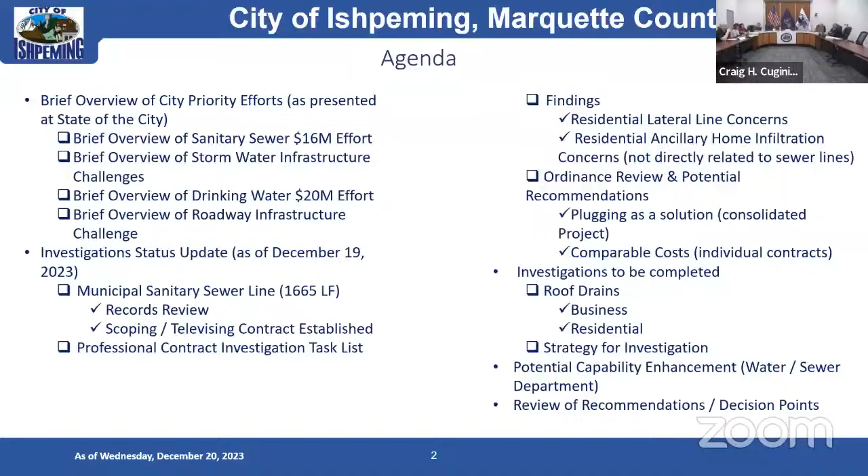As we go through, there are header slides for when we change sections. I'll call those out, and the slide will flash to the next slide so we don't spend time on header slides. I've given you a moment to look at the agenda, but we will go through this. A lot of it to start is background related to what we know about sewer infrastructure and where we're headed with some of our projects. With that said, we'll begin.

The sewer project is funded, and even as of today, our engineers with UPEA and the contractor are working out some additions and subtractions. As you're aware, we scoped everything on this map in our original request, based on real data of real cost at the time we submitted. By the time we got through the process and funded, we were about 50% of actual costs due to economy shifts. So we are rescoping to identify what will and will not be done.

Since then, we've also received notice that we are in the intended use funding for drinking water, $20 million of water. So we're looking to see whether or not we can align sewer and water together along those lines and get that into the scoping as well. None of the areas will change other than it'll be in or out.

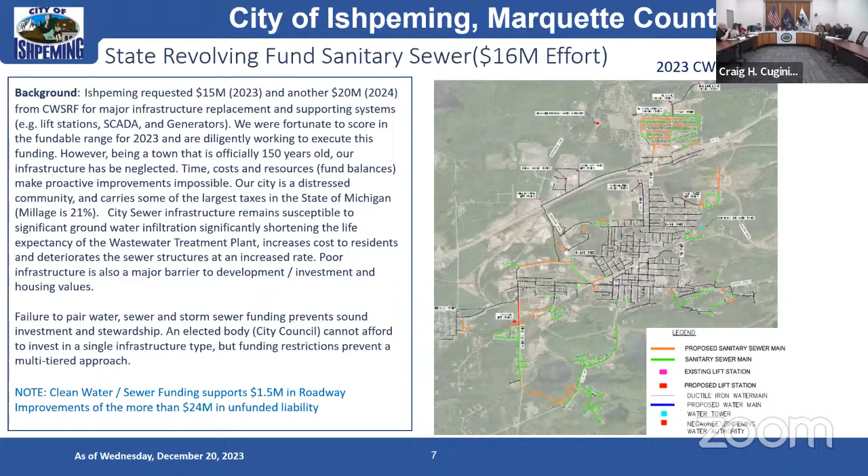Next slide please. Looking at the question asked by the council — was any of this downtown area included in the sewer project? The answer is no, none of the downtown investigated area is in the sewer project. Within the investigation, the results indicate that the lines there are newer, PVC, and in good condition. We'll have that for you in a little while, but that answers one of the major questions that was asked a couple times.

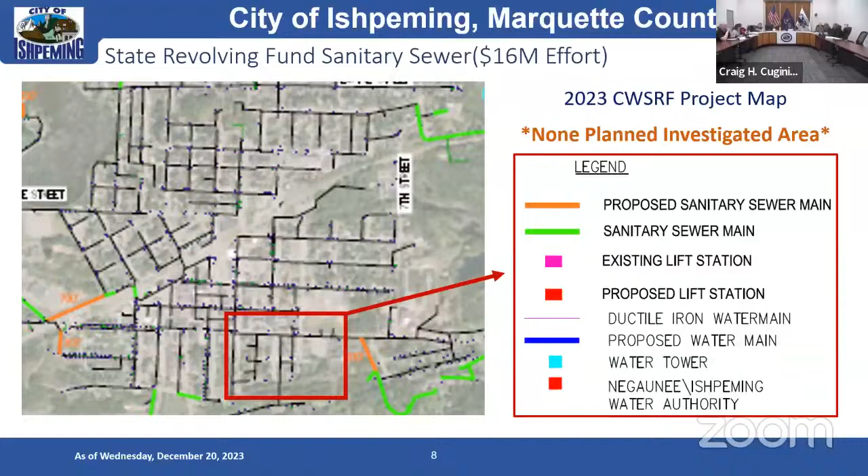Moving on to the next section, we'll do a little bit on stormwater. Stormwater is different from sewer and water in that it's harder to fund — to get a loan you need a revenue-generating tax base, and we do not have tax revenue generation for stormwater issues. So we must seek grant opportunities, which are very hard, and 100% grant opportunities are even harder. We'll have to figure out how that looks for the future, but we know we probably have at least $11 million worth of storm areas, and there are areas that were never even included in any stormwater project.

Way back in the past, when developments were made, they thought the soil conditions didn't warrant storm sewer, and now we find that there are areas where people's yards are flooded and other areas where storm sewer should be. So that's part of that $11 million.

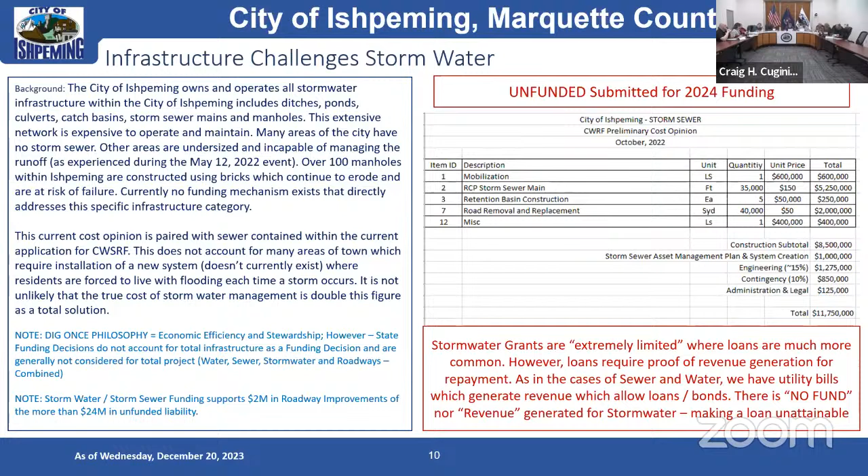Switching over to the drinking water, this is the new $20 million funding we're working on this year to be executed in '24. Again, this is scoped as our projected total scope, and where the final bids come in and the costs, we hope we can do better than the 50% scope we ended up with under the sewer.

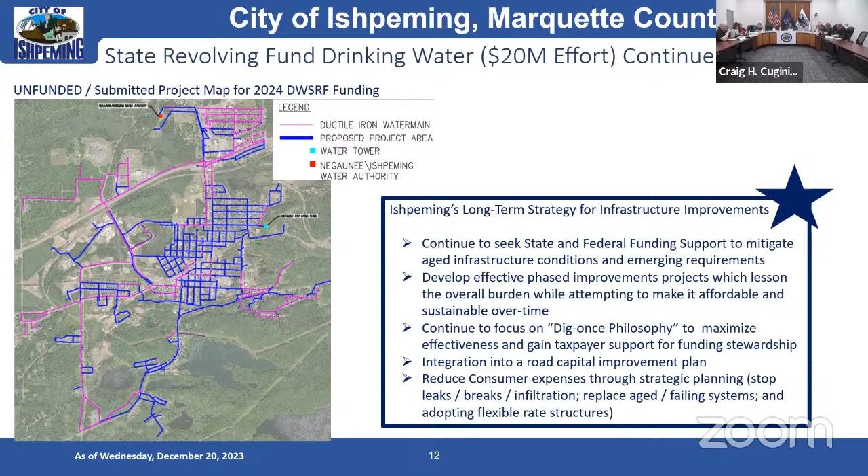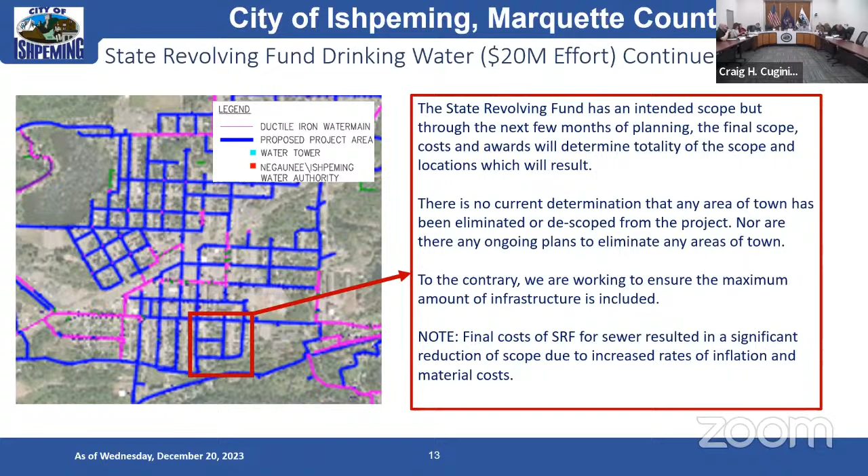Looking to the next slide, this is where you've asked us to look in that downtown area, and there is some potential project area for water in this location, which would ultimately likely result in some pavement work, part of the next discussion on roads.

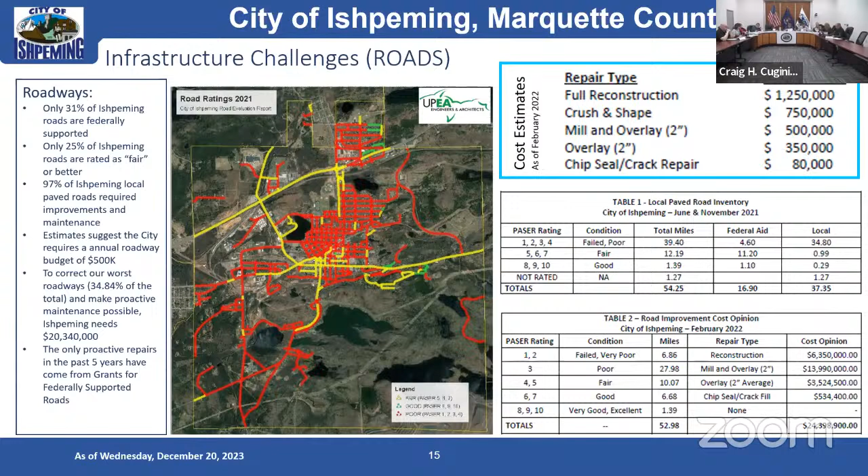So when we look at roads, this is the road map we've had. I'll call out that downtown area in the next slide. In that downtown area, it is rated as poor or failed, which is about 39 miles of our 54 miles. That poor rating results in a projected cost of mill and overlay at about $500,000 a mile.

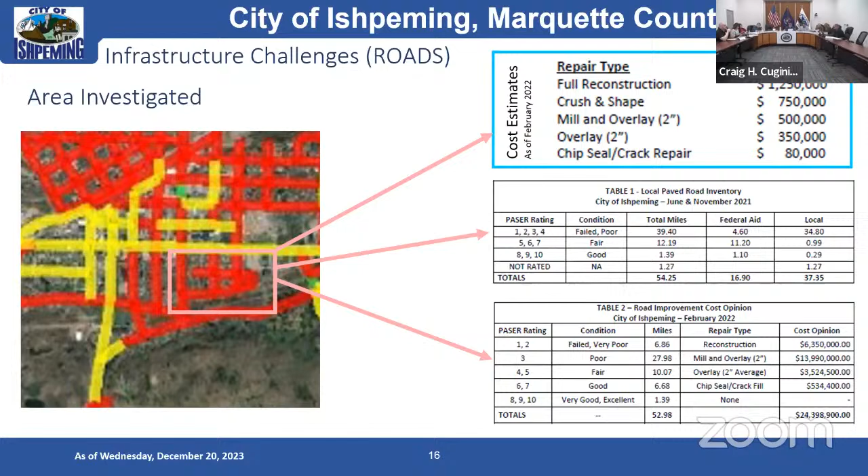So we have to do some calculations on the total effort that could be included based on what is included in the final water project, to tell you how much will be done, but we won't have that for at least 5 months.

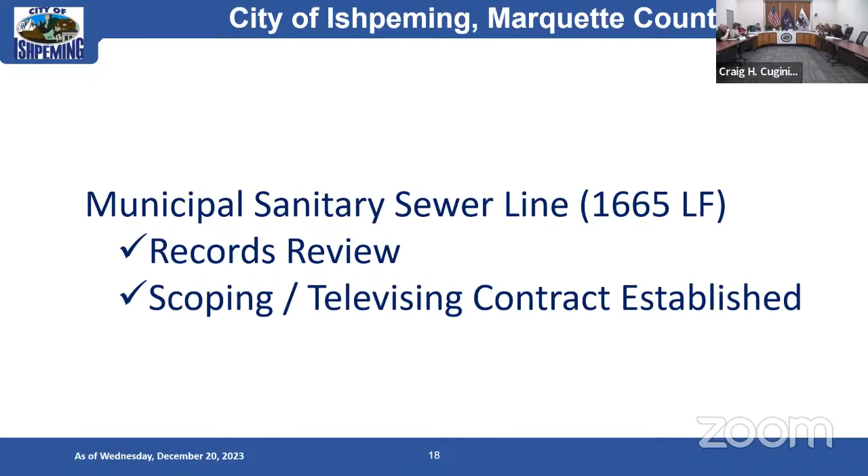We first wanted to make sure we located and understood where our sanitary sewer is. We wanted to look at our records and get in and do some televising. When we say televising or scoping, they're synonymous for us - it's a camera going through the system, taking photos and tracking with GPS where they're at in the line, so you can actually see where it's located. The green lines on this picture are the actual locations of the city sanitary sewer.

That sanitary sewer was a combined sewer, which was separated in 1982. So it used to be storm and sewer combined; now it's sewer separate from storm. When that happened, the old clay tile sewer system was replaced by PVC, and the storm sewer was replaced by concrete pipe, which is today's standard and is in good shape.

So then we also looked at lateral connections. When we talk about lateral connections, we mean anything coming off perpendicular to the city's main line, and generally laterals are connected to a home. So when we say lateral lines, we are generally talking about lines connected to a residential home, could be a business in a business district or other types of structures, but generally laterals mean connections from the home to the main line.

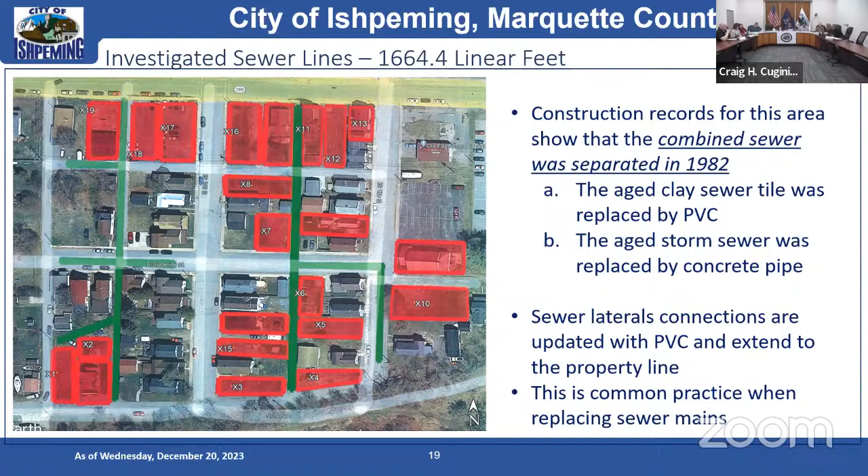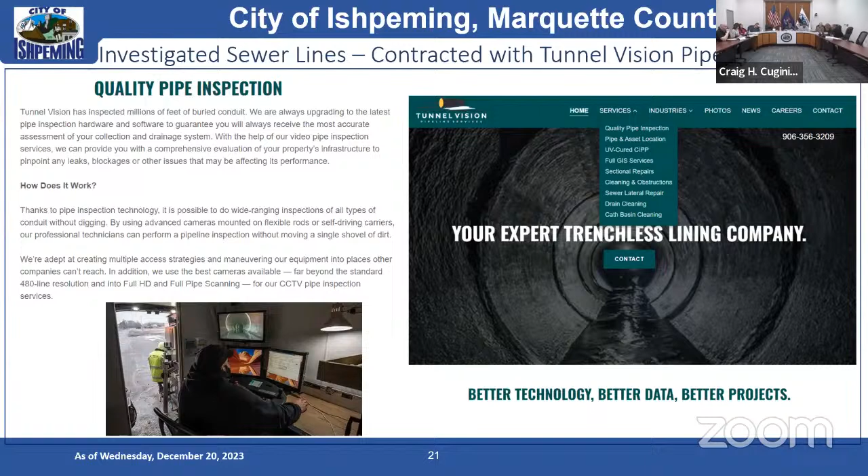So we have to contract with someone to do this, and a recognized leader in this service based out of Escanaba is Tunnel Vision Pipeline Services. They've been working with us for years, all across the UP and Marquette County. This slide just gives you a general idea of what they do and how they do it.

The next slide highlights a few spots. Basically, they're doing a pipe-specific evaluation that results in mapped assessments of the conditions of buried infrastructure, so you don't have to dig anything up to look. You can do it while it's still in the ground without causing extra disruption. They're intended to identify issues, what might be contributing to problems, and help us decide what the project would need if something was wrong.

That could be lines sagging, bulging, separating, cracked, or broken—any of those kinds of things are generally what we're looking for. We can also see tree roots growing through lines and other issues. Sometimes lines are blocked. Whatever the condition may be, this is how we can find it without digging up anything.

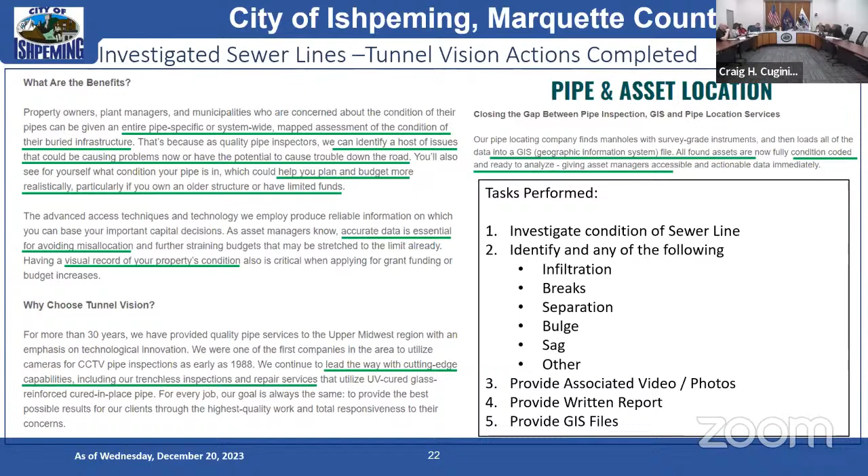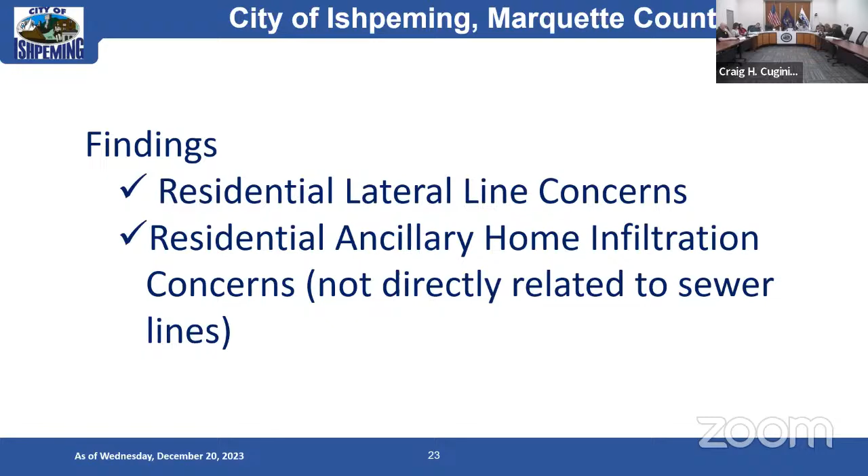We're going to start looking at what we've found along the residential area lateral lines. I used the word 'generally' earlier—the findings will indicate that not all of them are connected to residential homes, but are on residential lots. So there'll be some that are connected and some that are not. When we find they're not connected, we use the terms orphaned or abandoned, meaning they're laying in the ground, not connected to a home—therefore orphaned from a home. These are just terms we use, not meant to confuse anybody, but I want to make sure everyone understands what we're talking about.

We looked at these homes in particular as some highlights. We looked at the entire neighborhood—we're still looking at the entire neighborhood. We're not separating ourselves from it, but we wanted to bring out some highlights. Some of these homes were specifically addressed by residents in public comment at council meetings, so we wanted to make sure that when they're here, as they are tonight, they can see some of the conditions we found. This shows that we've investigated all of those, and these are some conditions we can call out to help you understand what we found.

When I say residential lateral lines, I'm talking about those connected to a home, but they might be identified as residential because we think they are, and then we might still discover they've been abandoned, orphaned, or cut off in some way.

That's part of the ongoing investigation, but I'm going to start turning this slide presentation over to Bill, because he's going to discuss and describe areas of the map, pictures on the map, and also contribute some video by sharing his screen on the projection for everyone to understand. So, Bill.

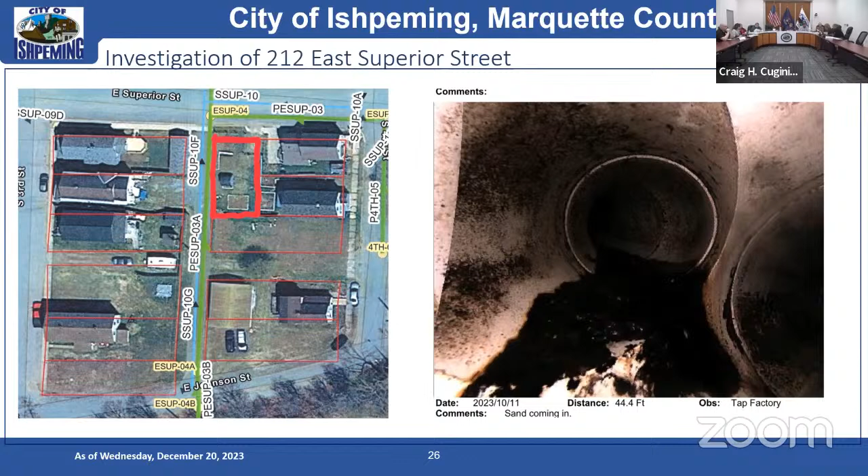I'll show a couple examples before I show the video. The first one you're looking at is on the corner of East Superior and the alley. There must have been a house there at one time. If you look at the picture on the right, that's the actual sewer lateral going into that lot—it's not hooked up to any building. Whether the building got torn down and wasn't capped properly, or the pipe broke in the yard, you can see all the dirt coming into that pipe.

So just to add some clarity and make sure everybody understands: when we have these pipes that are not connected, they're still underground, laid where they originally were. No one's dug them up or turned them—they're not tilted in any way unless Earth did it over time. But they're laying there with an opening, collecting water, and pushing water, dirt, and debris—we haven't identified exactly what it is, but it looks like muddy water. So what you see is those lines we're spotting on an empty, vacant lot.

They are collecting water, they are moving water and earth, and that is carrying into our city mainline sanitary sewer. So when we call out water infiltration, also known as I&I, some other industry terms, that's groundwater moving in, infiltrating the sanitary sewer, and all of that then goes to the treatment plant for treatment.

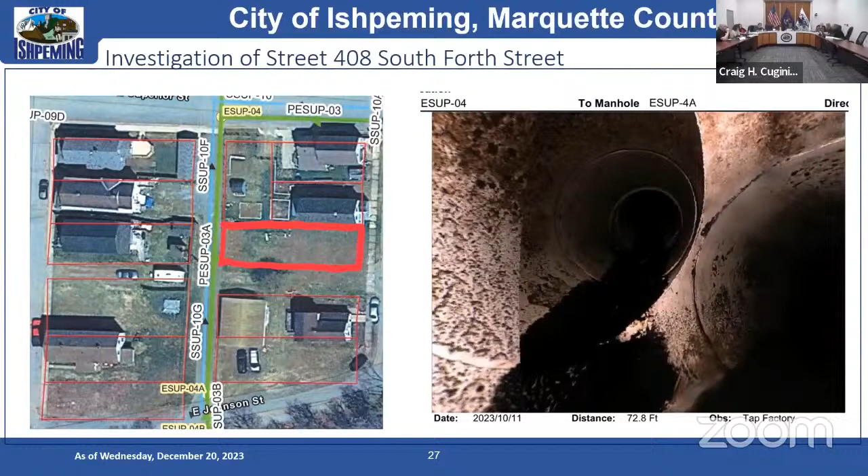Here's another example, same sewer line, main line. This one's on the west side of the line now. Another house was torn down, and you can still see the mud and debris that's coming into that pipe. This is another one that's not capped. Pretty sure it's not capped. I mean, you wouldn't get this type of debris any other way.

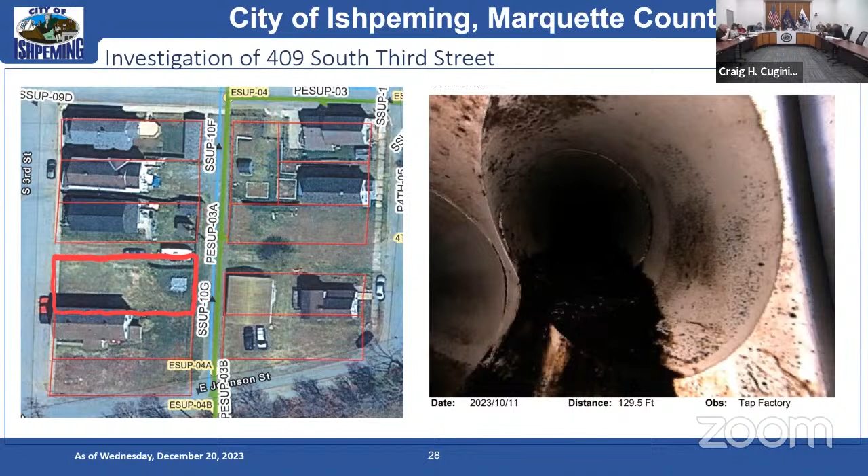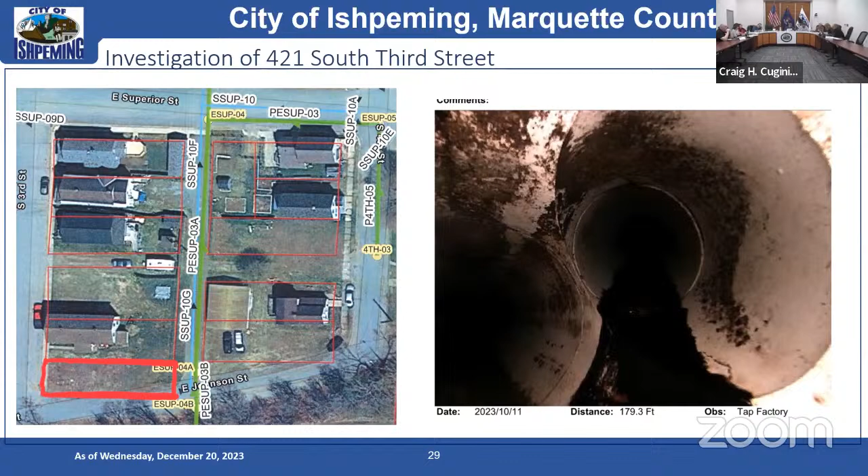This is also one right before the manhole. Another house was torn down, and you can see the debris coming in on this lateral.

Where was this one again? It's on Superior Street, but I don't have a record of this tap existing. So somebody did this, and I don't have a record of it. So we'll probably end up having to dye a bunch of houses in the area, but we can't do it until we have the camera in the pipe. And then when we dye the houses with different colors, whatever color comes in there, that's the house that has this tap, which absolutely needs to be fixed.

So again, just to be clear, what we're saying is that there is a line that was installed somewhere in the vicinity of Superior Street that is carrying likely sewage, but also has been tapped in a random way where you can see bolts coming through. But we don't know who installed it or when. It's not on any property record cards of the city as being an installation. That does not mean that they didn't draw a permit and have permission to do so, but we don't have record of that happening.

But in order to trace this line, we use a dye method, with multiple colors flushed down multiple toilets or somewhere into the sanitary system at a similar time, and watch for the color, and whatever color hits this is connected to this line. So we can't even say this is abandoned or not at this point, but that is a future assessment that has to happen in order to figure out where this line is coming from or going to, other than we know it's hitting the main.

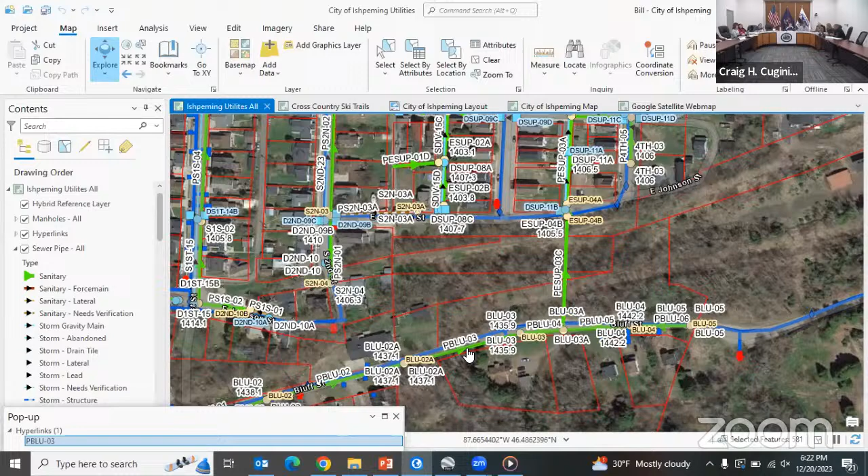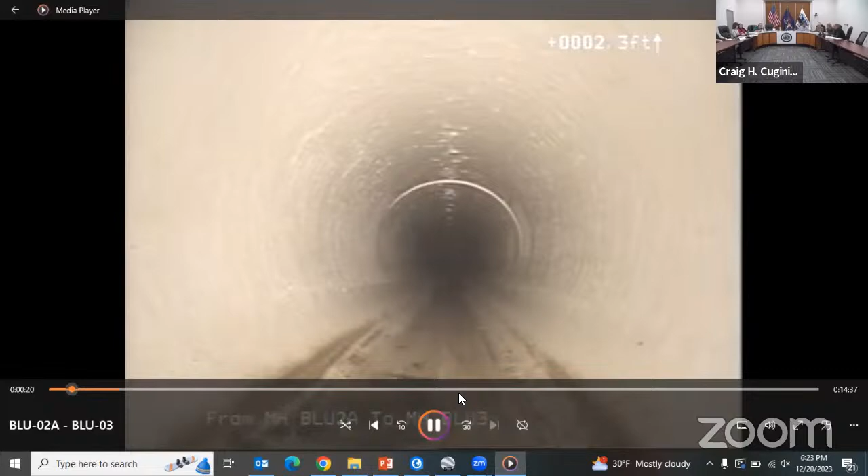So Bill. Okay, so this is our GIS map of the area. I wanted to show you one video first before I get into the other one, but this is the line that is in question, the one that has the most problems. This line up here is a contributory to it. And if you look at this video right here, this is what a sewer pipe is supposed to look like. Nice, clean, and everything.

So this is the line that's in question. And if you notice all the mud and debris on this pipe throughout the whole thing. Keep in mind that this pipe, we had to clean it before we could even videotape it. They tried to use a sewer camera, and the sewer camera wouldn't even go through there. So this has been jetted already.

What's the diameter of that now? 8-inch. And I knew this was gonna happen. Generally our mains are 8-inch, and generally laterals are 4-inch.

It's easier when you're in the office with two big screens. I hear you there.

Totally. So we can actually travel down the pipe. You can see all the joints are good. The pipe is new. There's no separations, no cracks, no roots, no nothing. You could sell this to VR.

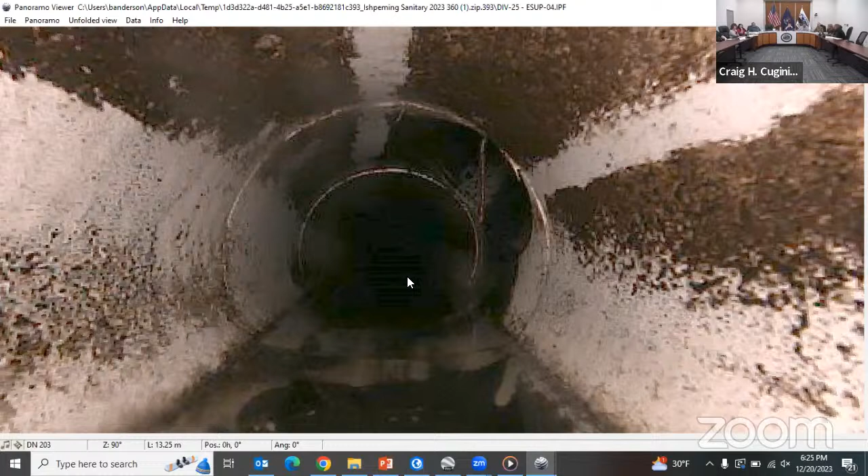And so as you're looking at this, we've evaluated 1,664 linear feet in this neighborhood of pipe doing exactly this. The camera going down through the entire length and looking for any kind of joint issues, separations, roots, other penetrations, things that aren't supposed to happen.

This is kind of where Bill's indicated what a clean, normal sewer pipe looks like, and then what you see here, and having to jet this. When he says the word jet, we run high-pressure water through the system in order to clean it, so to speak. It's like taking a garden hose, sometimes you have a little spray so you don't kill your plants, you spray light water, and then when you want to wash your car, you turn the setting to a harder jet. This is like almost fire hose jet kind of jetting when we go down this and clean it, and you still have all of this dirt and debris mark on the pipe. So just trying to give you some perspective of what Bill is indicating.

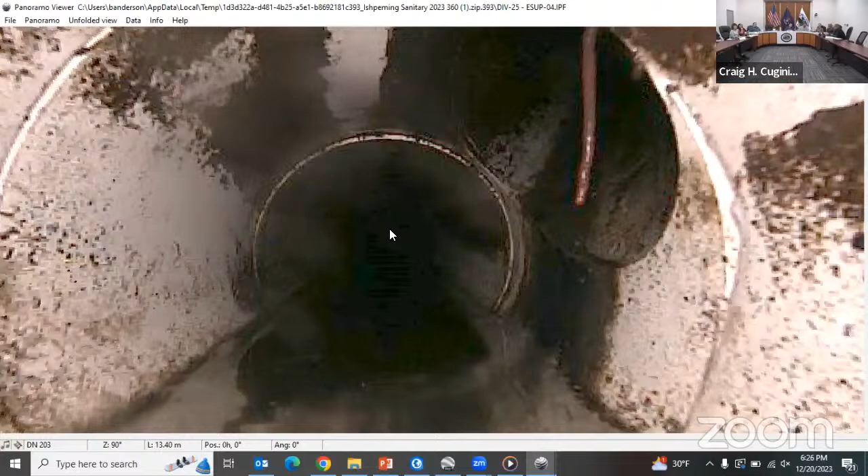You said you guys had to clean this before you could even shoot in there? How do you clean those? With the big Vactor truck. Isn't that the jetting you just described? Yeah, so the Vactor has a jet on it, and they can shoot water into the pipe at one end and have it flushing down as they're going. And they can push that water down at high pressure, and then make sure it's clearing the area we're going to investigate. Just trying to be educated, that's all. Nope, and that's what we want. We want everybody to understand what we're trying to do and how we're trying to do it, not an intrusion.

So this is the first lateral that we come to. This is actually a worm that's coming out of their sewer lateral. So there's obviously debris or something coming in, so their lateral has to be broken in some way, shape, or form. But just so you know, what we do is take the sewer camera, go down it, and you can tell where you are in the pipe by this number right here. And then what we can do... What size pipe is this one, 8-inch too? Yep.

It's not gonna let me do it so easily.

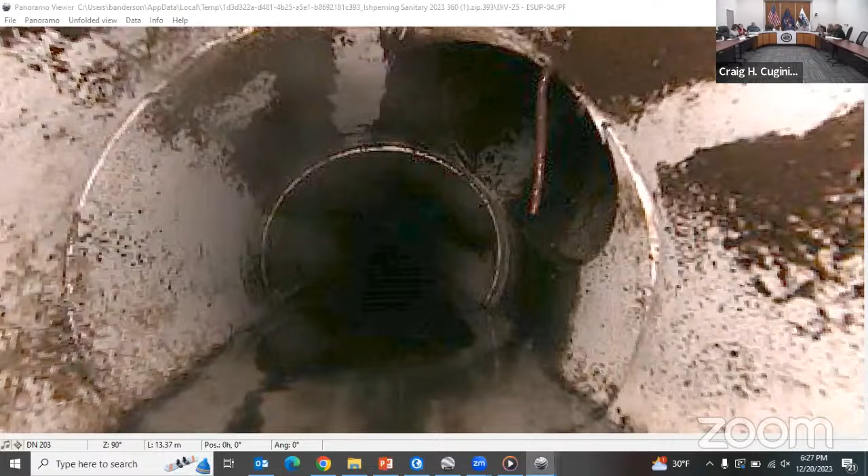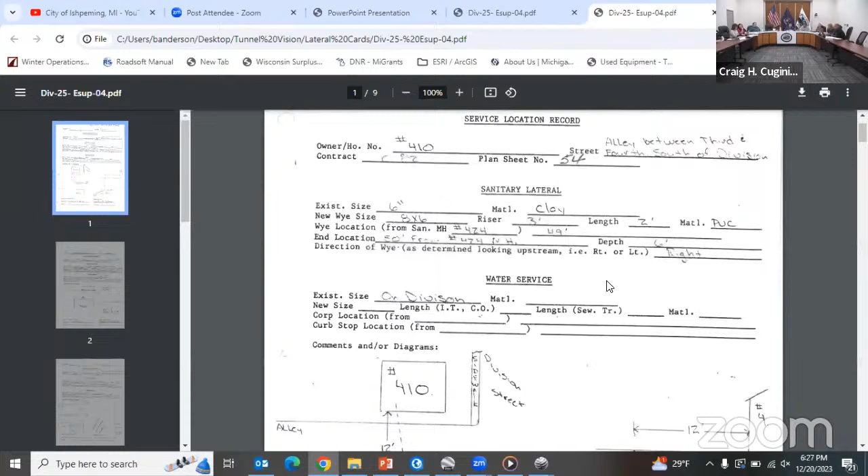This matches a little bit to the pictures shown on the previous slides too, where it looks like two pipes running together. So that's what you're seeing, Mr. Scanlon, when you asked if that's an intrusion. What was hanging down was an earthworm, probably associated with dirt. When dirt's infiltrating the system, that usually means a break, a crack, or some sort of penetration.

Were there any possibilities it was a joint that it may have been coming through? These are pushed together at the PVC joint, pushed together with a rubber gasket. It doesn't leak. For it to, the pipe would have to be sheared, or it wasn't installed properly, but I've watched this video, I've watched all of these videos, and every one of the joints is intact.

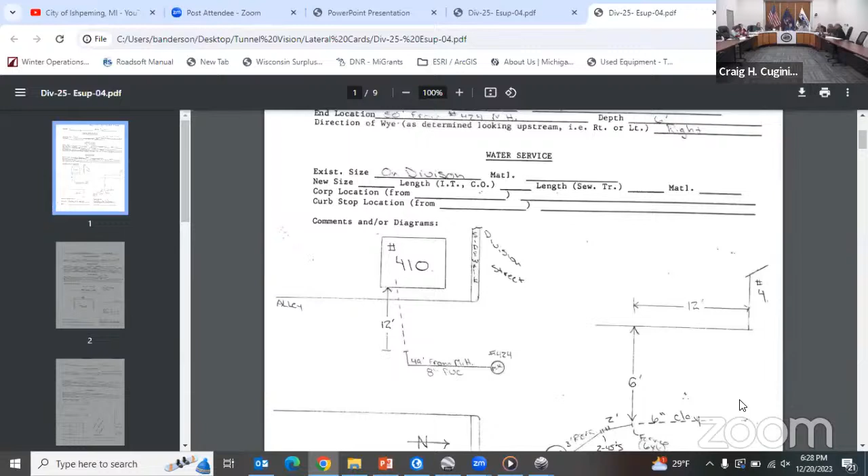If you turn the camera, which I'll do in a minute, you can actually look up and see 2-3 feet of the lateral. But what you can do is take that number I just showed you, and we have lateral cards for each one of the houses. This is gonna be the first house, and it's 49 feet from the manhole. So I can match up every single lateral to the pipe that I just showed you.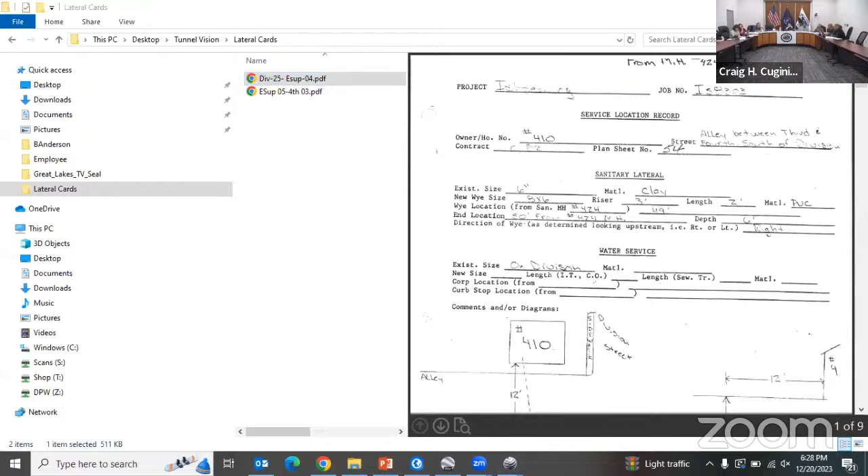On board this camera is technology that is essentially grabbing its place in space and time using global information systems, or GIS, to say you are here. And it's pretty darn accurate. It's the technology we use for surveying, the technology we use for everything. Your phone tracking you, getting you maps down the highway - that's all GIS. And so this is on board the camera.

One thing I would like to, if I may, for Todd and some people in the audience, I'm gonna ask what house that is. That's not to point out anybody's house or to lay blame - this is all completely neutral right now. It's not about blame. Another thing is who owns those vacant lots - that'll be asked, again not to lay blame or cause trouble. We're all working to get these things fixed for you. So don't get upset when I ask whose house it is and they answer, because that's gonna be a big question if I know where our problems are, okay?

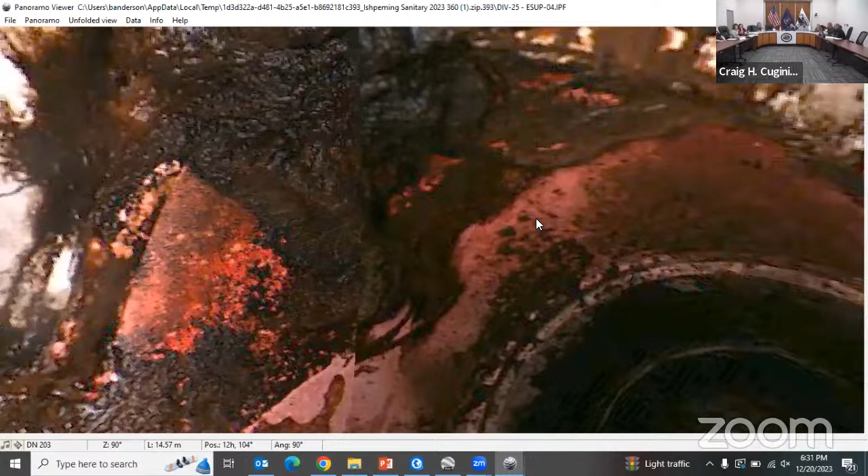So I mean, I can go down there and show you every one of these. Or go back to the lateral for 410, Bill, please. And what was your comment on that one? You can actually see the water - it's been leaking so much that it's actually stained the inside of the pipe. Oh, okay, gotcha. And all of this debris in here, that's mud.

Yeah, that's a lot. When I first started this, I was expecting to see a broken pipe somewhere with the amount of debris and everything. I've literally watched every part of this video, all of this whole area. There isn't a single pipe that is broken on the main line or where the laterals are connected.

A lot of it is the sewer laterals coming out of the houses or into these vacant lots, and we haven't went up the laterals yet. When I normally do one of these things, I expect to find maybe one house, one lot that is contributing. Never in my wildest dreams did I think there was, I think at one time I was counting 19 different lots that have laterals going to them, that I think have laterals that are contributing.

Again, I'm not done doing my investigative work, but this is what you wanted at this meeting. And I can tell you with 75% certainty that all of these are not connected properly. There's more work to be done. Have you guys went through the laterals yet? No, that's the homeowners.

So to that question, the first directive is to determine whether or not the city was contributing to a problem raised by residents. As we investigate and determine that the city line is intact, and as we find these contributing lines, we can then bring back to you a decision for how you want to address this. But again, going back to the initial question of what a lateral line is: a lateral line is generally a line connected from the homeowner to the main, for which ownership is usually the homeowner on a residential lot.

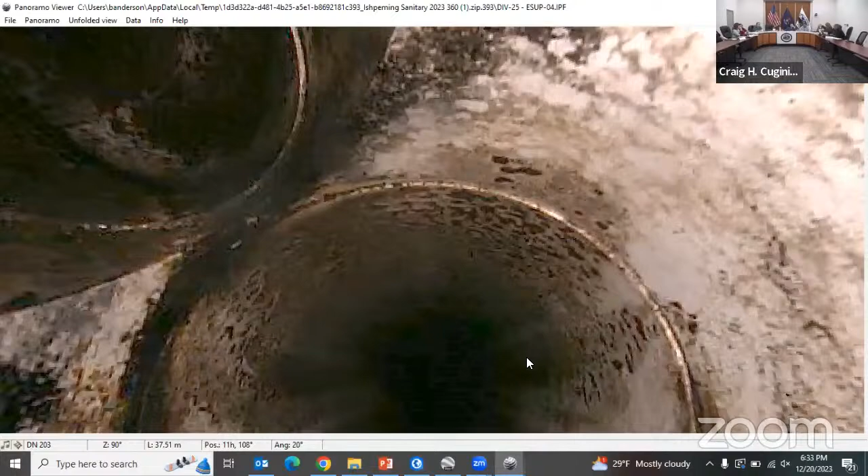And so we can look into the connections, we can look up the connections. We should not be going into the connection without the homeowner's permission or as a participation with them. Because if, say, the camera rolled up there and broke something, did we break it? Was it broken before we got there? Where does that come from? So we do not enter into the private property side of things right now.

But that is something that we can discuss and you can direct as you see fit. But we did not, for the sake of this presentation, have anything that looks up into the private laterals. And again, I want to reiterate, I'll use my friend Mrs. Sylvester. If we go over in her neighborhood and we know her house is a problem, I'm not in a position to say that the Sylvesters now have a problem on their hands and the city walks away by any means.

That's not where, and I think council will agree, what we're doing is we're looking at what's it going to take, in Kathy's case, to correct the problems that we may or may not find. You know, there's a million things that have happened here long before any of us were on council. There's things that have happened in modern times that might not have happened to the best ability of the city. Things like, well, they put new main in and they didn't offer help to the homeowners, we'll check your laterals while we're open.

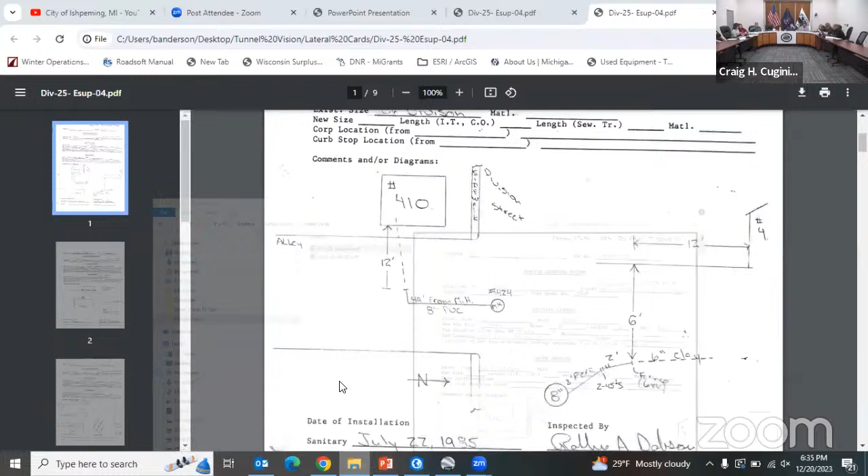No, yeah, and thank you for that clarification, Mr. Cannon. What I want to say is that we're following a systematic approach of first analyzing the city main, because the question was, is the city contributing or causing problems for these residents? And so we do it from what we know is our ownership first, and then we will list our findings and call them contributing. There are opportunities where infiltration is occurring. We don't know to what level or scale either, because we've not investigated that.

But to Mr. Mayor's question, did we go into those laterals? No, not yet. Could we help and work with residents to analyze those conditions and situations? Absolutely. We have some identified potential opportunities, and we can talk about those as we go through this presentation. But yes, this is simply to say what we have and have not done, and that there is a lot to discover, as Bill pointed out. We thought maybe we'd find a handful, and we're into two hands and two feet full, all right?

And so there's a lot going on down there, but so far the camera and video footage has indicated that the main is in good condition with some indications of contributing factors, which is what we have to continue on to from this point. Do we have more lateral video, Bill? Yeah, there's one, I'll give you an example of some more stuff.

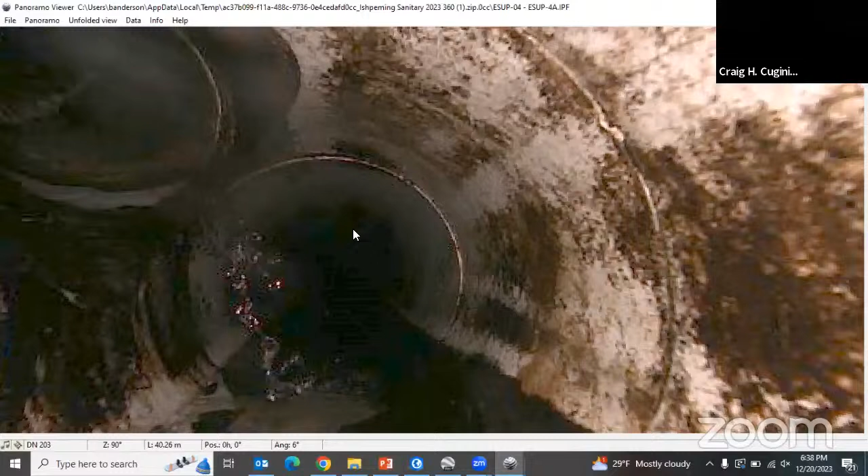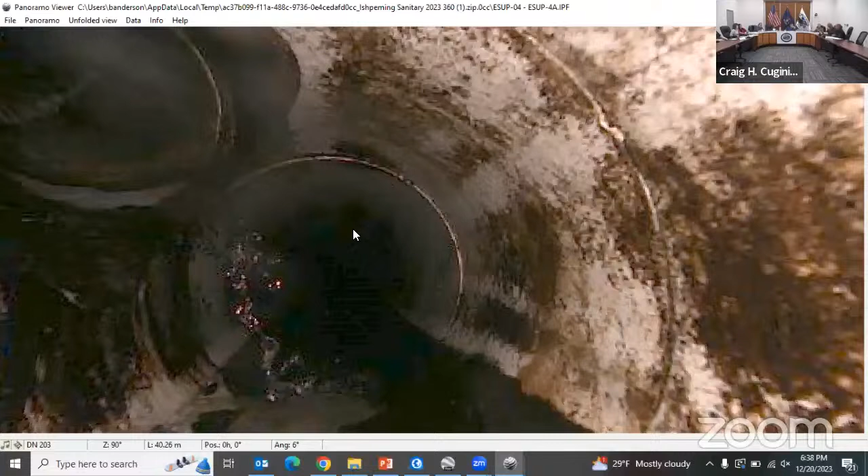We're sending a ton of mud to the wastewater treatment plant. Do they detect that? Yes. I think it was last fall, they actually lowered a Bobcat skid steer in to clean out their grit chamber. It was so bad, cleaning out all the debris going in there. Whether it's our debris, the township, or Negaunee, it's irrelevant—it's debris they have to deal with, and that cost is going to get transferred over to the citizens.

This lateral right here has got water coming down it, which shouldn't be abnormal, but the video guy sat there for 20 minutes and it never stopped. So I went back to the videotape from 5 years ago, and it's the same water just pouring into this thing. This is actually a lateral that is in use, so it's broken somewhere between the home and the main line, and it's contributing water.

But again, would dye be used there? No, I actually know this one for a fact—I know it's coming from that house, there's nothing else in that area. The dye is for determining if it's groundwater or house water when I don't know whose lateral it is. That's how I find it, for detection.

How can you tell that's groundwater and not potable water? One way is to go to the house and tell them to stop running everything. But when a house is running for 20 minutes like this—not just this time but 5 years previous—it's the same amount of flow coming in. If it were their water use, they'd notice an increase in their water bill.

There's another slide coming with more investigative work you can do, but we'll talk about that in a minute. To your point, what we do is identify that there's water and try to figure out what's causing it. We can turn off all water sources in a home and see if it's still flowing. If it's running for 20 minutes, people will notice if their stuff is shut off, because the bill will go up.

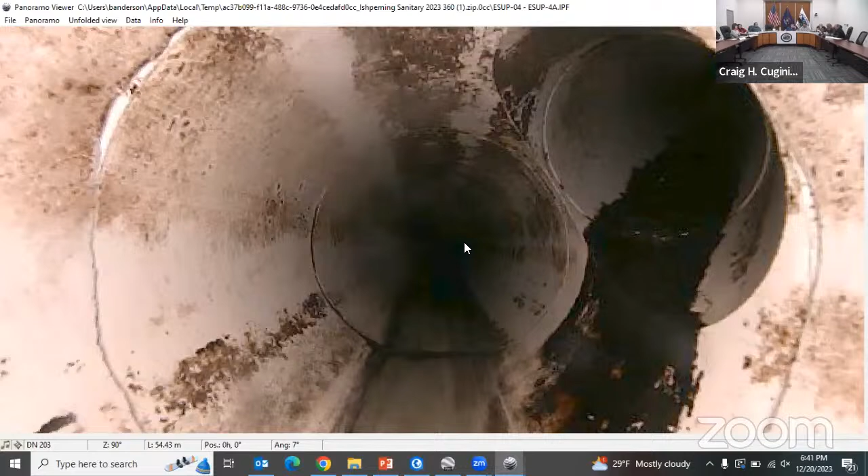So we are working off of indicators, right? We're not testing the water to determine whether it's groundwater or drinking water. The dye is simply to trace a line—meaning in that one condition where we don't know how it got installed, have no record of it being installed, and don't know which house it's connected to, that's when tracing is needed. We have to find out what's doing what, and that's what the dye is used for in that case.

So I get another lateral down the line, a vacant lot that has debris coming into it. I can show you more videos if you guys want, but it's the same thing over and over for both of these.

I have lateral cards that show whose house it is. We're estimating 19 contributing circumstances so far. We don't know the cause or condition yet, so we don't want to lay a pin. As we say, that one looks like groundwater, we might find it's something else. But we know it's contributing to infiltration in the sanitary sewer system onto the city main. We have more investigation to do to figure out what that is and what the solution is to stopping it. We're just doing indicators as we try to analyze the entire system.

1,664 feet doesn't feel like a lot when you walk it. But when you're scoping it, looking for cracks, water infiltration, and dirt, and having to clean it every time you go to do another camera pass, it takes time, energy, and investigation.

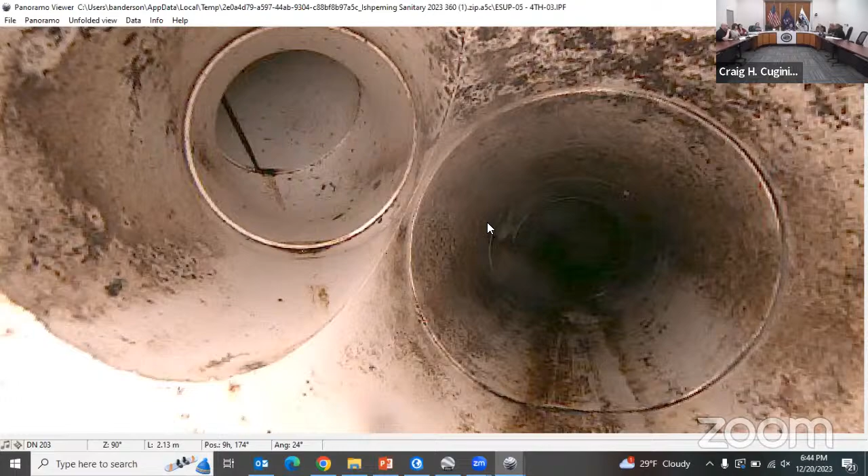So this is actually a lateral I can tell you with complete certainty is capped properly. You can see nothing has ever flowed through this pipe. There are actually 3 of them in a row, very close to each other. I know this one was a house torn down on a lot, and it was done properly.

This one right here, you can actually see the staining again, so this is groundwater coming in. And this one, so far, this is their old line. They decided not to use this line, something must have happened where it broke or something. The homeowner, rather than replacing the whole line which went all the way down their lot, cut across the sidewalk and went to the pipe, they came out of their house and went straight to the manhole. I have the records of that. So yeah, they fixed their problem, but now that sewer lateral is contributing to this problem again.

So it's something that has to be dug up, and we'll show you a slide for informational purposes, the one you referred to that you're sure is capped. Yep, the clean ones. We should record that the vacant lot at this address has been properly capped.

All of this information is going to be entered into the GIS. So if you go and click on a person's property, we have lateral cards for each one of those properties. Eventually we're going to be doing the thaw reports, so if your house has been thawed over and over, you're going to get it on that GIS. This is a living document that, hopefully, when I'm gone, people will be able to pull up stuff and won't have to search through 9 million books and videos. It'll all be in one place.

Yeah, and just trying to help understand what that means, right? For anybody that doesn't understand, when we put something into our record system, into a GIS shapefile, imagine it as the library of all things infrastructure in a computer.

Just like going to the library, you can file that house's information in a specific location by file naming structure and then pull all things associated with that house. The picture of that lateral is one file, the video is a file, the record cards from past records have been scanned and placed into that. Anytime there's new work or a visit to that home and there's a condition investigated, the guys have those tablets - they can take pictures, upload files, and put that right onto that property record, where in the past you had to go find the file in the library and hand carry looking for stuff.

And we're continuing to do that for vacant lots - all things within the city as we go, every parcel through. Every parcel has an ID, and it's associated to that ID.

This is also part of a lot of the grant work we've had - the drinking water assessment grants, storm grants, the sewer grant. All of those things required us to trace the lines, identify where things are. The water lines right now, our guys are out getting ready to paint valves blue so that the engineers can come out and mark them on the GIS. They did an airplane flyover of all of our city - they had big X's running around town. And so they've been doing all of these things and storing them into our database.

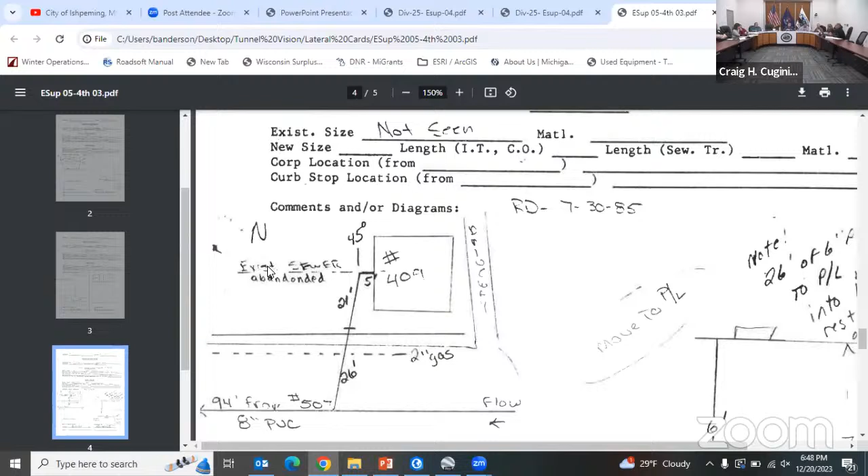So this is the one I was just telling you about - this line broke, or they had damage, or trees grew in it, whatever. But they stopped using this line and this is the line they now use, so they got a direct line that goes right into the sewer. This one right here is going through a big lot - it's an indented lot, so obviously debris has been going in there and it's become indented. You'll actually drive by there after a storm and it looks like a lake, and you go by the next day and that lake is gone. Lakes don't evaporate that fast - it went somewhere, and now we know it's entering the sewer system.

And you can imagine, Mr. Scanlon, you indicated that over time things change, right? So you put a new sewer line in - well, that new sewer line may take a new route. Or, if as a homeowner I found that there's a new sewer line closer to me and it won't cost me as much to fix this - instead of going 90 feet, I can go 40 feet and save myself 50 feet of cost. That's what you see in those property record cards - there was a condition that caused a change, probably a cost-effective change for the homeowner in this case. And then now we also see a condition indicating

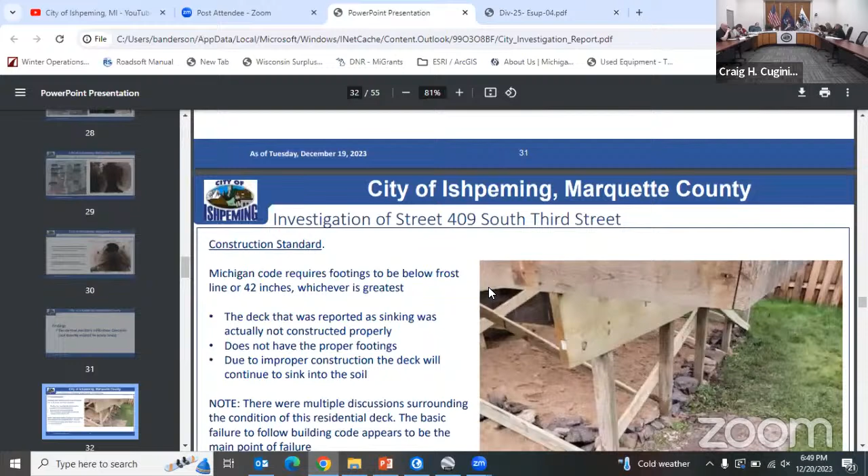infiltration. If that was done in modern times, if that was my house, and I said, you know what, we can shoot here - would I not be required to terminate the sewer? Yeah, you are. And nowadays, anybody that does a sewer, whether it's disconnecting or if they tear down a house, either I have to go visit and inspect the site, or they'll send me videos or pictures, and we either require you to cement it, great stuff, foam it, and then put a Fernco over it.

And a Fernco is a rubber cap. Preferably you do it where the PVC line is, not the clay tile in the yard. So you have to find the PVC, because anytime they do one of these sewer jobs, it's not required that the city does that lateral. The city does those laterals just so that nobody has to dig up that road again. So anytime there's a sewer project, we always do a PVC sewer line to the opposite side of the sidewalk so that you don't have to do this.

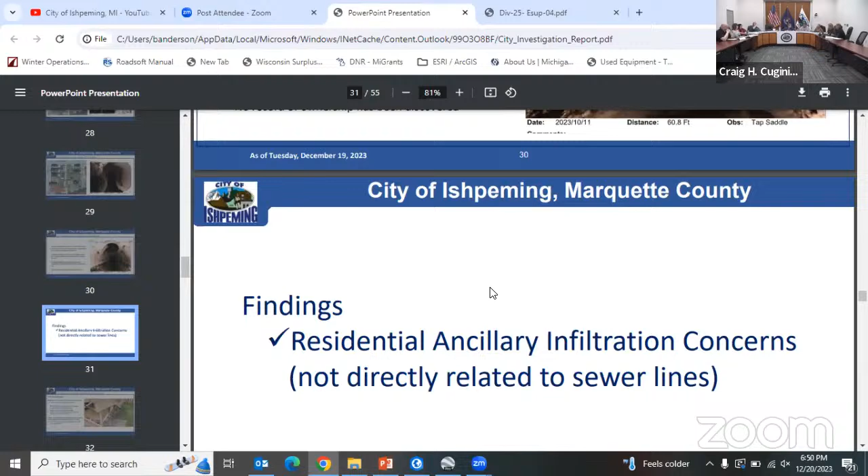But we don't necessarily know if these are all uncapped or if the line is destroyed or something like that - or do we know? We have indicators, right? And we have not got complete knowledge, but when we go further in this and we talk about capping or plugging a line, if it's been abandoned or orphaned, we would be talking about capping it where it connects to the main, not trying to find the whole line and figure out what the problem is. We would say it's not connected to a house.

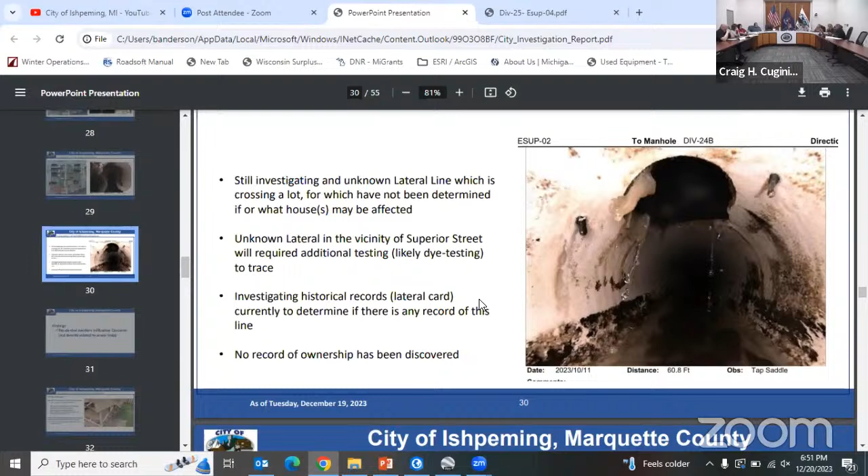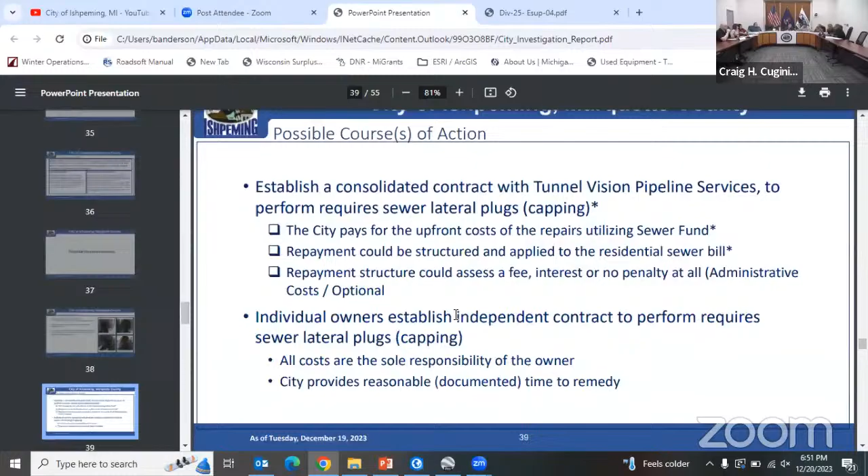We don't have to make it a solid, full connection. We just need to come there, cut that, plug it, and be done. Whatever's left in the ground can stay in the ground. It can hold water all at once, as long as it's not contributing and infiltrating into the sanitary sewer. When it's a lateral connected to a home and needs to be open for residential service, now you're talking about a full line that has to be investigated to make sure and repaired or whatever is necessary in order to keep that line solid, because that needs to be used, not a broken or non-functional line.

Is there a way for these to be capped at the joint? Oh, it is, yep. Oh, and that's what we're talking about, is at the joint. Yes, on abandoned and orphaned lines.

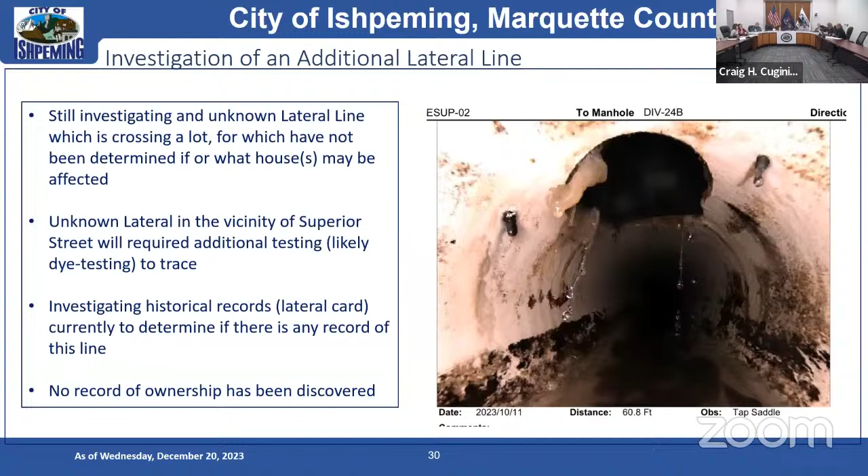So what we're looking at here is connected in use, right? Those lateral lines used by residential customers, which indicators suggest there's significant leaks. Leaks are a myriad of different types of problems. These are always considered a resident-owned lateral.

We believe there's approximately 10 right now that look connected that may be contributing infiltration of dirt and sludge. That number's a plus or minus number, right? Because we're looking at indicators. And there's ways to fix those depending on the condition.

So I'm gonna try to keep it simple, but if you have a tube and the tube is supposed to be whole in a straight line, then that is a good line. If it's completely solid and made of the right material for today's modern technology, which is PVC for sewer, then a solid PVC should not allow any breaks or infiltration.

If there's a break, it's how. And so there's lengths of PVC that are connected and slid together, and they could break at the joints, they can come apart, and they call that separating. They could break and crack, and the joint could break. They could break and have holes or punctures or fractures in the pipe. So all of those things are breaks.

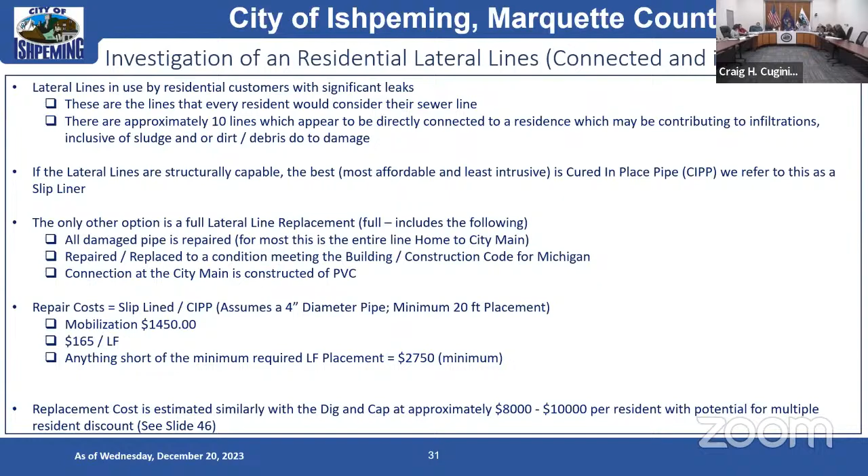So, ancillary to infiltrations, Todd had stood up several times to let us know that he was having trouble with his deck. And so this is his deck.

Again, this goes back to your question, Ms. Scanlon, of what was past and what's current as far as codes and what's allowable and not allowable in past and future. In the case where this deck was falling from a home, there's no footings - well, there were none visible to us, and that's what the picture shows. So I don't have any visual reference to it, I apologize.

No judgments being made, I'm not doing that. I'm saying that we don't do that investigation. I think this one probably should have been investigated further if we're putting it into the slideshow.

Well, I guess these are indicators that we're talking about as part of our investigation, and specifically we were asked to look at the deck. So we did. There could be conditions where, if it's not properly footed - if it is, it is, if it's not, well that's not, we don't do codes again. But if we looked at the deck and didn't communicate or figure out if there were footings in there, it shouldn't even be in the slideshow like this.

That's my point - we don't do building codes. The county does building codes, and we coordinated with the county to look at the indicator of whether there was or not. They indicate - you asked us to look at this condition, and we reported on this condition.

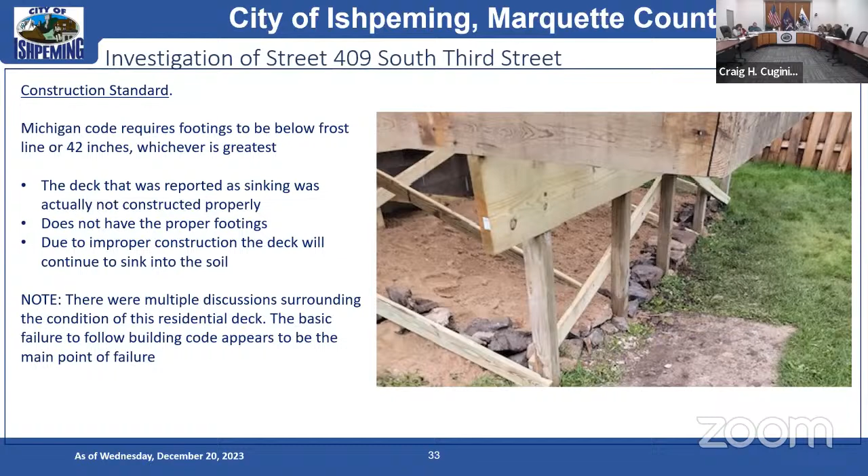So at 319 East Johnson Street, the homeowner was visited. Bill went into the house with them, talked to them, and one of their major complaints was large volumes of water in their home after a rainstorm, which they manage with a sump pump. The sump pump was actually connected to the sewer, so it was pumping groundwater from the basement into the sanitary sewer, which is not allowed by code. We also see the flow coming from the wall toward the center or right of the picture, which is penetration through the foundational wall.

There's been some conversation, and I believe the homeowner has already fixed, or is going to fix, the sump pump issue. We've been making contact with some of those homeowners and working on some of these things as well.

Water is clearly getting in through the foundational wall. Is that the only place? I don't know, but it's a pretty good sized hole in that picture, and the resident indicated that he did see water coming through there.

So this is what people call a Michigan basement. In the old days, you built your walls, and depending on whether you had money, you either left the floor as mud, or if you had the money, you poured cement. Nowadays that doesn't work, because that seam is where water is going to come out anytime the ground becomes super saturated. So it's a construction issue.

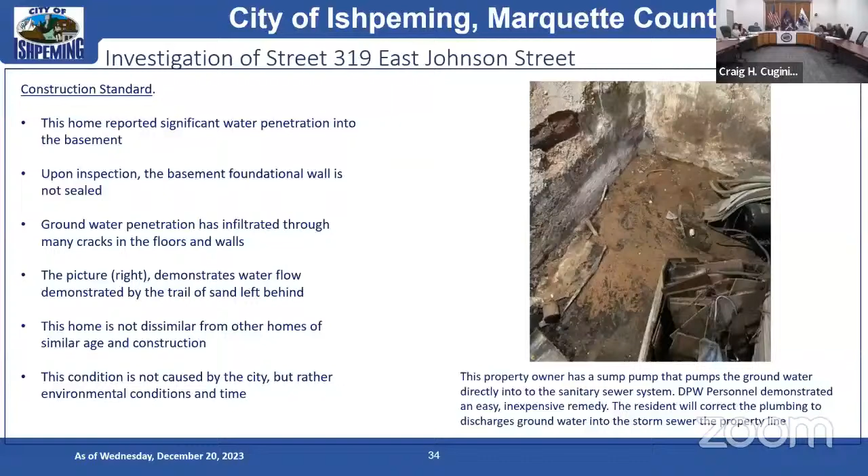So next slide, please, we're going to go over some of the potential issues. All we're doing here is evaluating the process and procedure of the city against conditions caused by natural disasters, time, construction standard changes, realignment of infrastructure, whatever the condition is. There are two things that come to discussion when it comes to City Ordinance 12-700 related to the sanitary sewer. We just identify what those two are, where our process and procedure is black and white, but the environmental set we're exploring is not black and white. So as a council, you'll be asked to evaluate what our ordinance says and what we're trying to remedy. That's what that slide is.

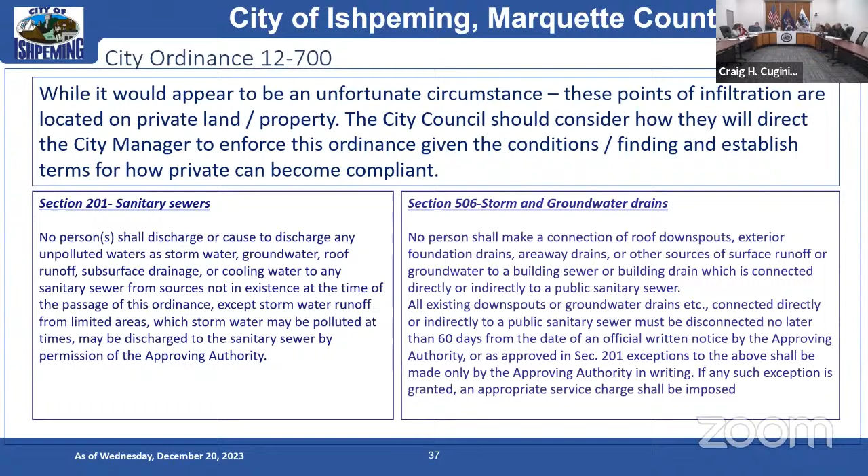Next slide, please. We're going to talk about a couple of recommendations that could be easily done, possibly done, or could be further evaluated over time. So when we've determined there's no record of cause or history, meaning the city didn't realign something or there wasn't a specific event, then we have to evaluate whether that's a city or a private resident condition.

When there is something that is known, as Mr. Scanlon was trying to allude to, if there's a condition where the abandoned lateral line is contributing to a deck failure, then we have that condition, we know it happened and when and where. We can link those two things and make a different kind of decision. For uncapped lateral lines that are completely not aligned, we need to close that gap, get to those joints, cap them, and stop the infiltration. So how you get there, when you get there, and who pays, that's all to be decided by you guys based on the conditions and evaluation.

I do have a question relevant to this. Didn't the city inspect these when the buildings were torn down? Or are we not supposed to inspect them? That's way before my time. I understand, I don't know what the practice was back then, or what the practice is now, because there's not a person on staff who would have been here when this happened. You're right, that could be a question worth exploring, or it could be that it wasn't a conditional requirement and the standard changed.

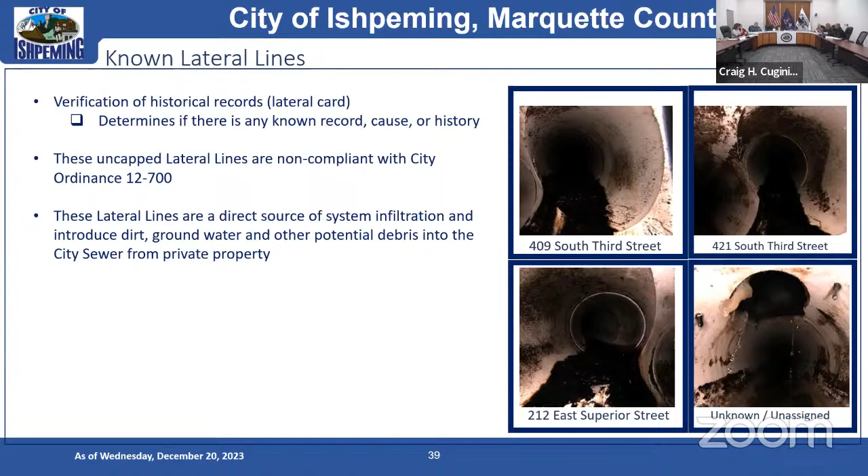We often want to recommend slip lining and cured-in-place pipe over a new pipe installation, if there's an opportunity to do it. We're on slide 39 right now. This is the stuff that will be before you at some point for decision. There might be an easy decision tonight - use sewer funds and cap these as we find them, as long as we know they're empty, abandoned lines contributing to infiltration. We can get the contract established, start closing those infiltrations off, and continue to investigate and assign cost to the responsible party at a later date. If I might, that's exactly what I wanted to talk about.

I was going to wait, but as long as we're on that subject, I'd like to find out what it would take to identify the abandoned lateral lines causing problems with the unoccupied lots. Can we cut blacktop and use the Vactor?

There's another way coming. I think that's one action we can take tonight. Well, I think we're getting there. Yeah, I think you'll see the answers coming. Okay, but let's just get to that point.

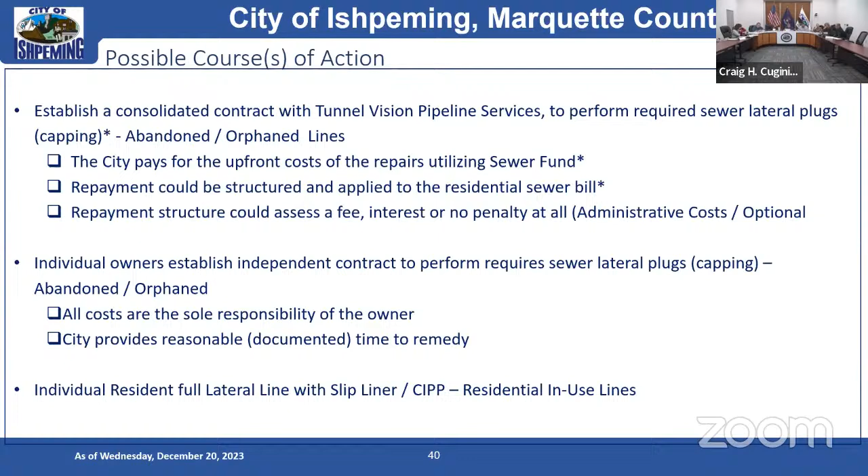So look at the next slide, unknown lateral lines, course of action. At some point we have to determine ownership, but right now we're not looking for that. Right now we're looking to stop infiltration, close the sucking chest wound so to speak, in military terms. This constant extra flow of water into our sanitary system, we can absorb that cost in the sewer fund, stop that, and then determine those other things.

So we've talked about that one at Superior Street. As long as we can validate the historical records and validate that there is no actual use, we don't want to cut anybody's house off, we should be able to identify how many, where at, and establish a contract in pretty short order to get those done.

Given that we're doing it at the main, and given that Bill's comment was that the video indicated the joints were all good, that's the best scenario for us, because that means we can come in doing it without digging up a neighborhood, and not having to do anything but get in there electronically and mechanically and seal and close those lines off.

So it's kind of an inline service, arthroscopically. Yes, for lack of a better word. Perfect term for me, thank you. Arthroscopically, they can get in there and do it without penetrating.

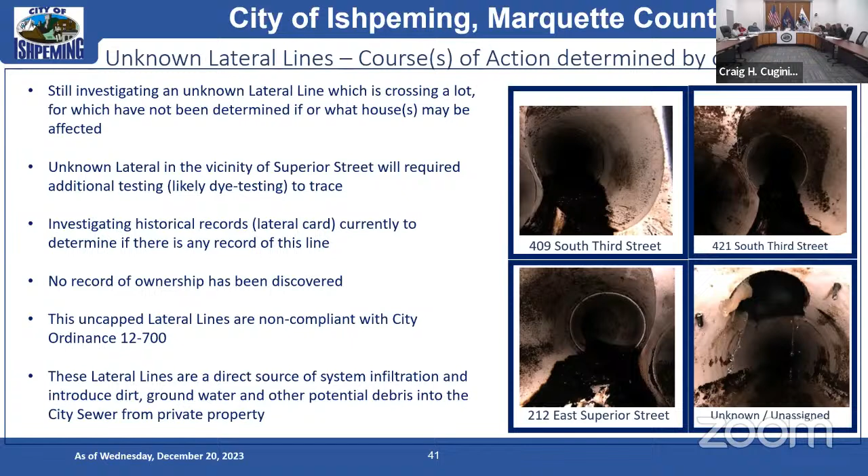And so we've come up with some of those costs for you on slide 43. They call this a remotely operated vehicle. We've called it a camera, we've called it a scoping, we've called it a televising, but using a remote operated vehicle, they go down and they actually perform a line plugging.

Imagine sliding something over a cap and then shrinking it in a way that you stuff something in so tight that it can't move, and then you shrink the outer side of it. It's solid and sealed, and it's the technology allowed by code. It seals and plugs that. So we call it plugging, capping.

Those are interchangeable terms, but they would have a one-time mobilization charge if we do a group project, or an each mobilization charge if you do it individually. For an 8-inch or a 4-inch lateral plug, you're looking at $2,625 plus a one-time mobilization fee times the number of caps or plugs. The option is, if someone says they want you on their property doing that, if they did it on their own, the likelihood is it adds about $900 per individual install.

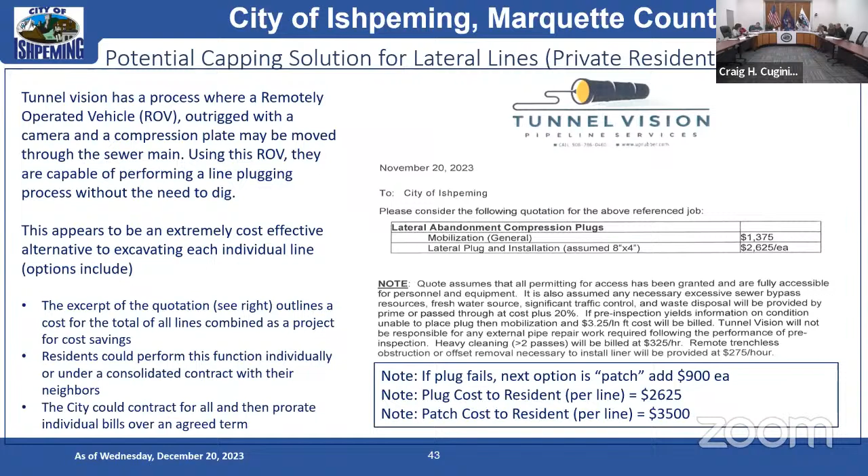So you could be looking at, I don't know what that number was of abandoned yet. Do we have that, like abandoned versus actual live numbers? No, so we suspect there's probably between 10 and 15-ish, I think, is where we're leaning. Again, we're making some estimates right now just to give you some ideas.

That $1,375 is a one-time price, and then the $2,625 is an every-plug price times the number that we find, which is quite frankly not very expensive to help start buttoning up this line issue.

When we looked at giving you solutions and options, the next slide is just for those considerations where if later down the line we say it was residential ownership versus municipal ownership, we could then just figure out a rate by which someone could repay. So we gave some samples of what that might look like, and you could basically prorate it—pay up front, pay later, no money up front pay later, and you could put it to the utility bill. Those are just some samples of what that could look like.

Again, we're not recommending one way or the other. We want to have the information to look at, evaluate, and absorb. When we do that kind of stuff though, we do recommend there's a recorded lien or some sort of deed restriction so that if the house is sold before it's paid off, it does get paid out of those proceeds. But again, that table is there for you guys to see options.

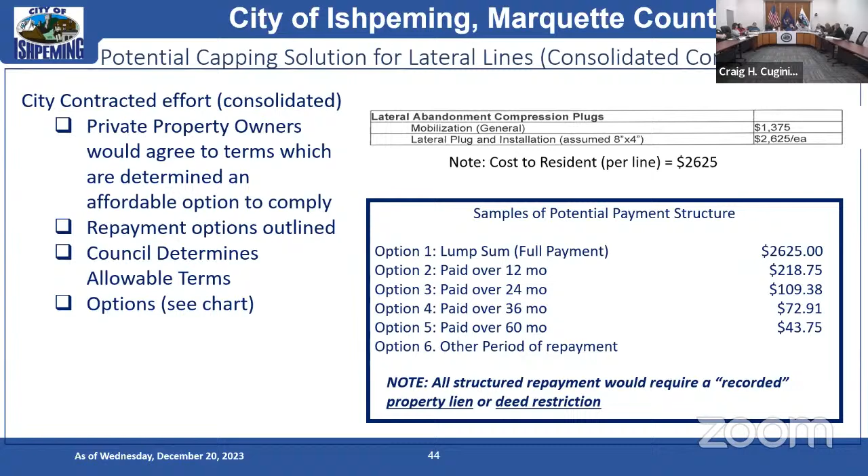I've got some data from East Point, Michigan, one of the places where I've seen this employed. It's where the city can absorb the cost and put it on a meter or utility bill paid over time, so there's no upfront cost. We get the bulk rate pricing, volume makes a difference. And if you do it at the same time we're doing the main, it becomes something. So it could be a discussion for the future outside of this neighborhood, but it's not too far from our future if we want to look at that as an option. That's to give you a sense of what it might look like and how that might start to shape out for consideration.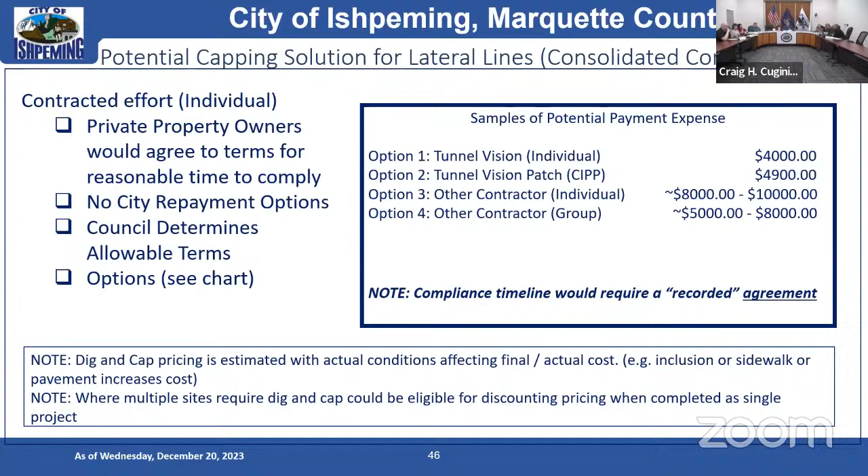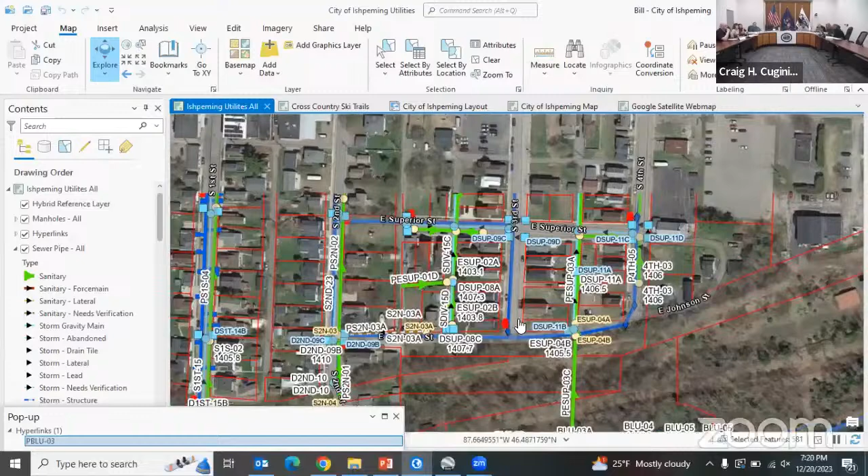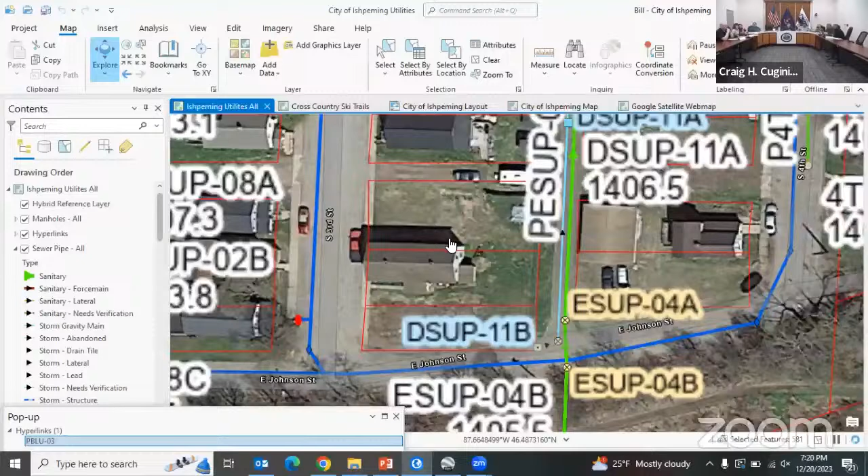Before we go to the next part, the roof drains—can you share my screen one more time, Jason? When we're talking about property ownership, all these lots are parceled. Let me find a good one. I can actually click on any one of these empty lots and it tells you who the owners are. They're not municipal ownership, they're all owned by somebody.

In this instance, the person that owns this house decided they wanted extra property, so they bought this lot right here. So this homeowner bought this lot. Not only does he have an extra lateral that comes out of this property into the main, his lateral itself goes underneath the garage and is leaking. That's the one with the water that's constantly flowing.

So he would have to do a slip lining. It would cost him way too much money to do it any other way. The problem with doing it that remote way is, say this guy no longer wants all that property and wants to sell this and develop the house. Now that line is capped inside the main.

And you're talking 14 to 20 grand for them to dig and redo that whole sewer line. If this was my house and I owned an extra lot, I would pay the extra 2 grand to have it dug down right by the property line and a cap put on, because it's gonna save me if I ever decide to sell this piece of property in the future.

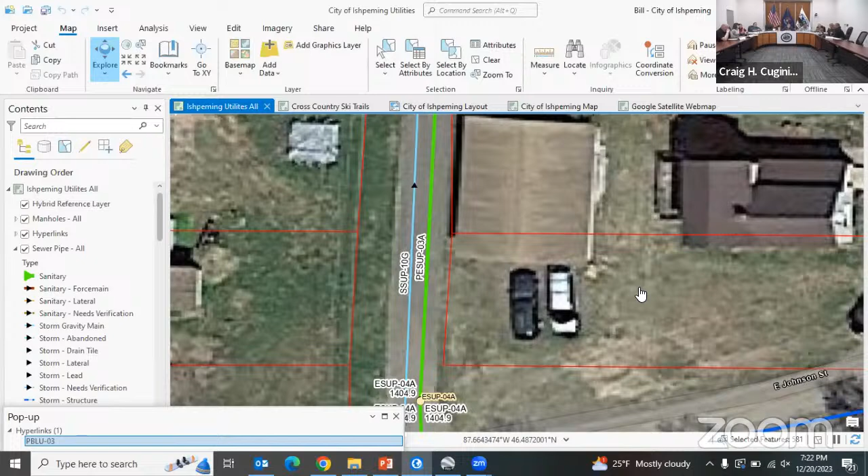So that's why each homeowner has to make that decision. It's not something the council is just gonna say, okay, plug them all, because each individual has to make that their own decision. Let me just make sure everybody understood that.

The tapping or capping or plugging at the city main is permanent. It eliminates a homeowner's option to change their mind later. What Bill is suggesting is that by coming 4, 5 feet in from there and capping, the homeowner can come back and cut that cap off and do something later.

So they've left themselves a choice for future changes or development. Maybe there's a change in an ordinance or in the way we do housing someday, and there's an opportunity for an accessory dwelling unit, a small house, a tiny home or whatever, and now they want a sewer connection, and they can because they've left themselves that option. Those are things we have to also look at when we say where do we plug, how do we plug. But again, those are things we just want to offer as consideration, not telling you what or how.

But if there was a condition like that, and there is for this homeowner, there may be a dialogue that occurs that says, well, what do you want, and what's the city opportunity? So we're asking you to think about that as well.

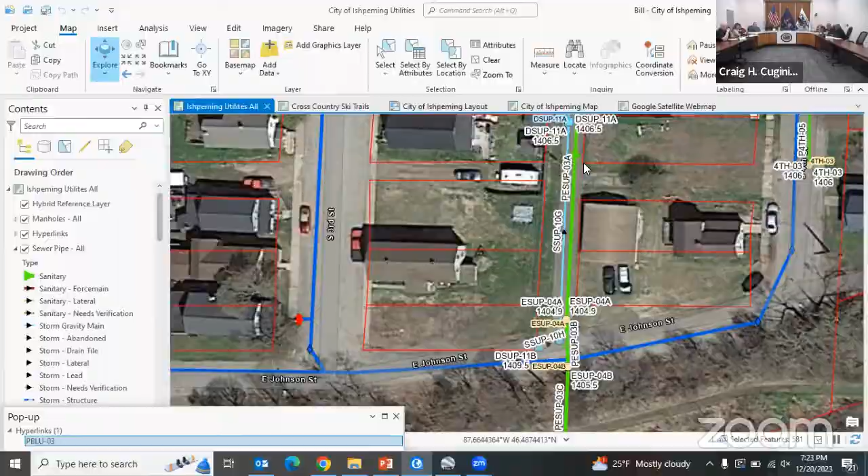Okay, so going on to the roof drains now. This appears, Mr. Mayor, as if we're leaving the neighborhood, but we're not. What we're looking at is a contributing factor of the entirety of that downtown wet space.

And as you look at this map, you see somewhere between 50 and 90 flat roofs. On those flat roofs, they average about 3,750 square feet of surface space. And that represents about 2,328 gallons of water contributing to our sanitary sewer in a 1-inch rainstorm.

If we all think back to the May 12th storm of 2022, that was 3 inches in a half hour. So you can multiply that times 3, times the 50 to 90 flat roofs. What we still don't know, the indicators lead us to believe that the majority of those, but maybe not all, are direct drains into the sanitary sewer.

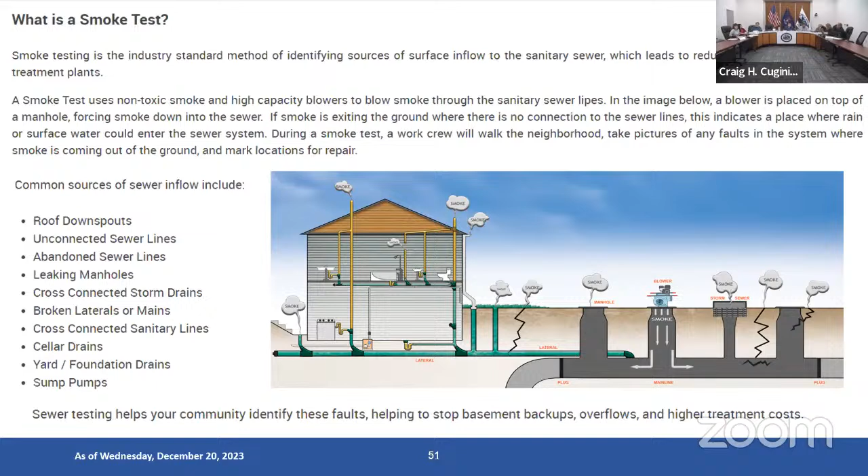We just widened the circle of downtown that we were asked to look at because there's so many in that area. We would ask that you consider giving us some direction on how you want us to do that, or what kind of other investigation. On slide 50, we're looking at what those options would be. The city can do dye testing; the city would have to contract for smoke. It sounds like smoke isn't the most favorable option, and that's fine — we're not necessarily making a recommendation to that. But we would definitely need to identify the complete list of those flat roofs and then work out a strategy for making sure we can get to and test those, because again, it's on a private business or a resident.

We're on the roof. Probably we can use our bucket truck to get there to introduce the dye, but we still have to coordinate that. It's a method, it's just a slower method, is what we said. And then blueprints is another option.

I just think that this is a separate thing and this is brand new to us, so I really would like to get into a motion. I have a question, before we get into a motion. Can you go back to the map there, Jason?

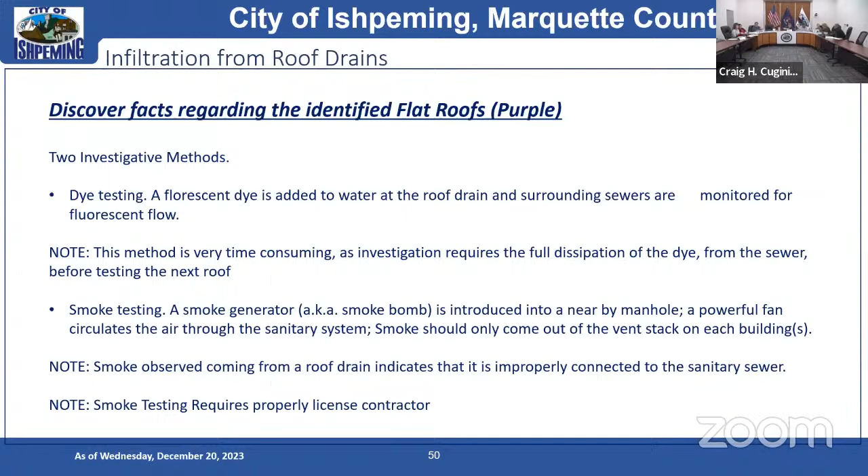This is our water drainage line here, right? And this line is the same one that accepts the drainage from the city. In our road repair, are they going to dig up all of those and replace those sewer lines, or no? On the map, the yellow line is the main storm line, and it's the main travel for all of the utilities coming from the city down to the intersection by the Oasis gas station and going across.

My question is, in this plan of things, would it be possible to put a separate storm system improvement to accept the water from the city, so that we're not accepting all of the city's water in this one? That's what I'm asking.

So what we're suggesting is the water doesn't belong at all in the sanitary sewer, and it wouldn't matter when we take it out, it's no longer going to get to that section. We're recommending the water come out of the sanitary sewer, and it absolutely affects that neighborhood because everything's going from the top of the hill down into town, and this is one of the low spots in town. Okay, that answered my question.

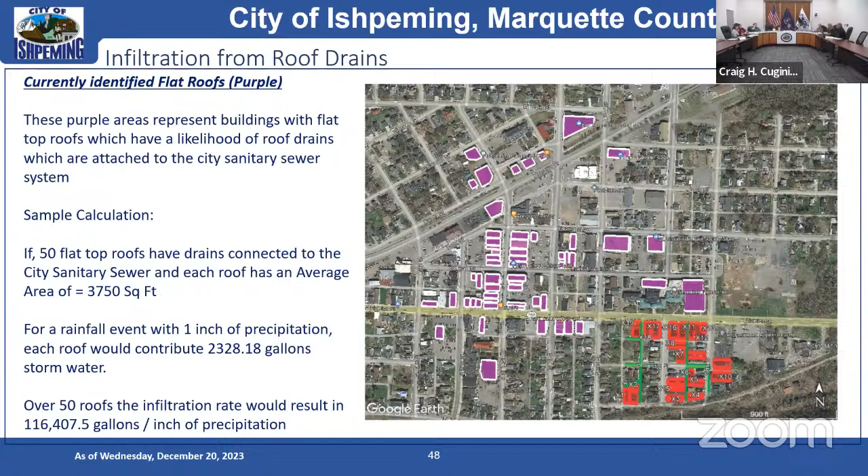And so that's why it absolutely exists. I apologize, I'm not trying to be argumentative, Mr. Mayor, but you asked us to look at the total circumstance, which is introducing large quantities of water into the sanitary sewer, and what impact that was having in the town. You asked us to not limit ourselves, but to look at all things and consider all things.

At one point we even talked about a lot of other things too. Exactly, and this is a to-date status update that you asked me to present. So to date we've identified these things downtown with respect to laterals and mains, and we also identified these flat roofs as a potential introduction of significant water into the sanitary sewer. This is going to be a continuation, probably for a long time, which is what we've been charged to do, is look at the system, which is why we're doing $16 million sewer projects and $20 million drinking water projects.

It's not small. All right, well, I'm going to make a motion right now that we pay the full amount to repair all of the pipe issues that are south of the high school out of the sewer fund at no charge to the residents, and that we work with the residents to make that happen. I fully believe that this is something most of these folks did not bargain for, and I also don't think they should be having to think about this over the Christmas holiday, on where they might be able to come up with money. So that's my motion.

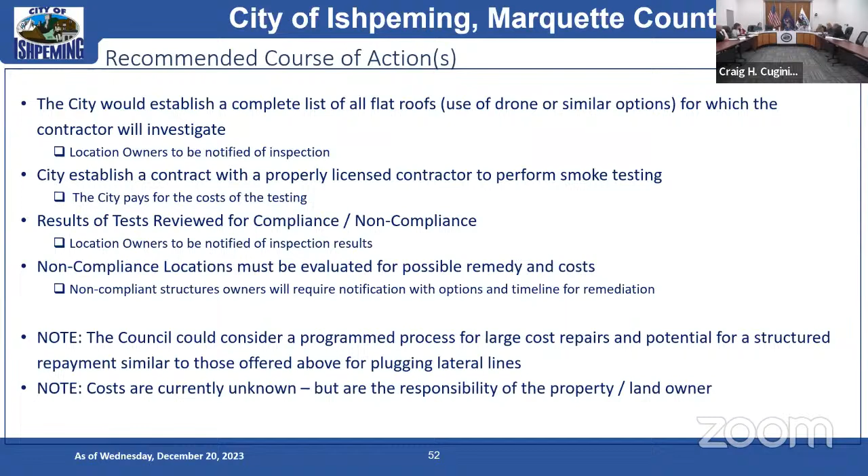We don't have to do any excavating, we don't have to break ground or disrupt any blacktop if there's good blacktop there. In my mind, that would come out of the sewer fund - not as a motion, but at the monthly meeting in January I would hope council would have the information for a quick review of this portion and take action at the January meeting.

Just on the vacant ones though - those are the big troublemakers right now. I think we have to do a root cause type of analysis here. What's the biggest problem we've got? I think that's the biggest problem.

So at the January meeting, do you want me to have talked to each one of these people and found out who does and doesn't want the plug? If you're able to, I can if they're home - it certainly wouldn't hurt even if we don't get them all. But those align to cost when you're asking us for exact cost associated with the project. If we haven't gotten the answer from a resident as to whether they do or don't, then I can't give you exact cost - I can give you the maximum cost based on the number of lines.

Exactly, but you said exact cost, so I'm pointing that out because words matter when we're trying to do the right thing. So it sounds like you're looking for the maximum cost associated with abandoned lines and to start discussion with residents. Correct, and I'm sure we're going to have to develop a document releasing us and confirming that they did authorize that plug.

So my couple of questions are: to identify those lots - that's pretty easy. But then the next step would be to identify what that problem is. Because without sending the camera up there without their permission, we don't really know - it might be something easier. No, the plugging is going to be the absolute easiest - it's just a matter of looking at the lateral cards which tells me exactly how many feet I have to go up. We would put together a plan that says where we want the plugs. That's all easy stuff.

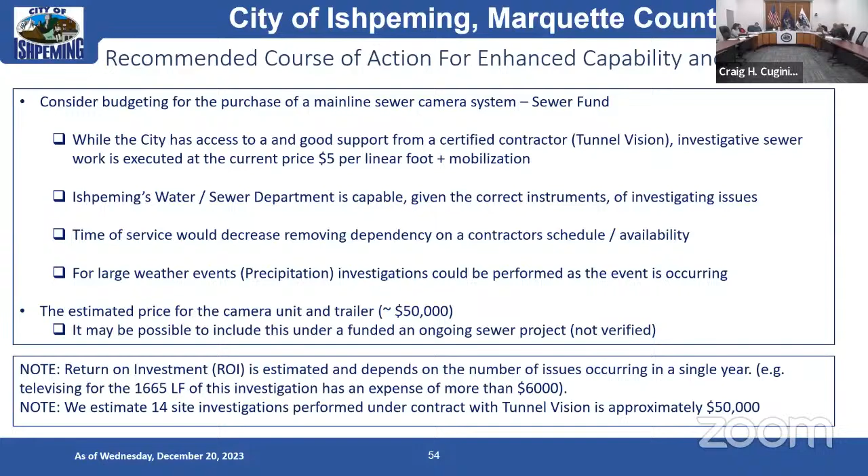Full support on that. The next slide just gives you an idea of what that might look like, what the equipment looks like. At the top right is when it's folded down, it gets put through a manhole, and as it starts rolling through, it articulates, can turn and pivot and do all kinds of things, and it ties back to a computer, wound up to a trailer. So threw that out there as something to consider for the future.

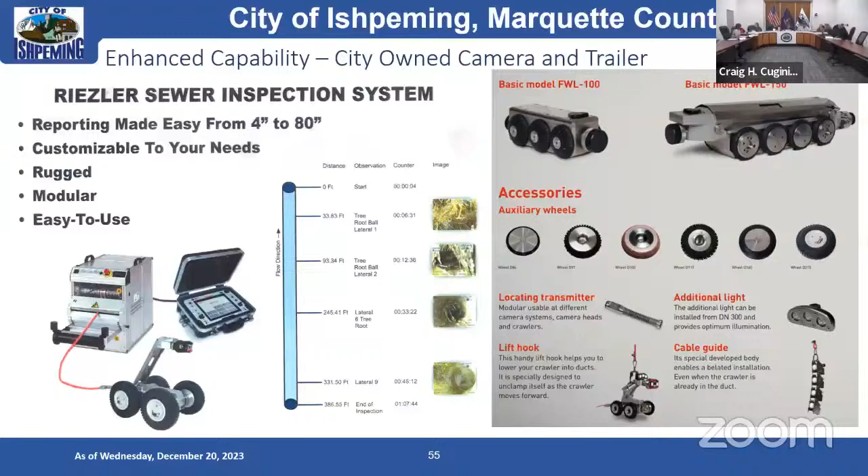I think you brought that up to me one time, and I told you I think it would be a good idea. Yeah, I know. I would be happy to support something like that, too.

Okay, so if we go to the last slide, this is where I had indicated there might be some potential discussion for possible decisions to be made this evening. Not looking for any, but there were some.

I think we've discussed lateral lines to a beaten dead horse. I think for the roof drains, you've indicated your desire is to maybe look at some dye testing, doing it the low intrusive way, also with building blueprints, and see if we can identify some of those numbers as we go forward, and not pursue smoke testing.

So I think you've already given us that direction. Did I take that correctly, or is there something I missed related to roof drains? Yeah, the roof drain thing, to me, I didn't know was coming, so I haven't had enough time to digest that.

That's kind of on the back burner right at this time. The roof drainage, I agree, is part of our storm sewer issue. But this is groundwater and stormwater infiltrating the sanitary sewer, from roof drains that are connected and pumping that roof drain into the sanitary sewer.

I understand. So I do have one question here. Wouldn't, if they had a peaked roof or whatever you want to call it, and it rolled down into the street, wouldn't it be going into the same system? No, it isn't. It goes into the ground, it goes into the storm sewer.

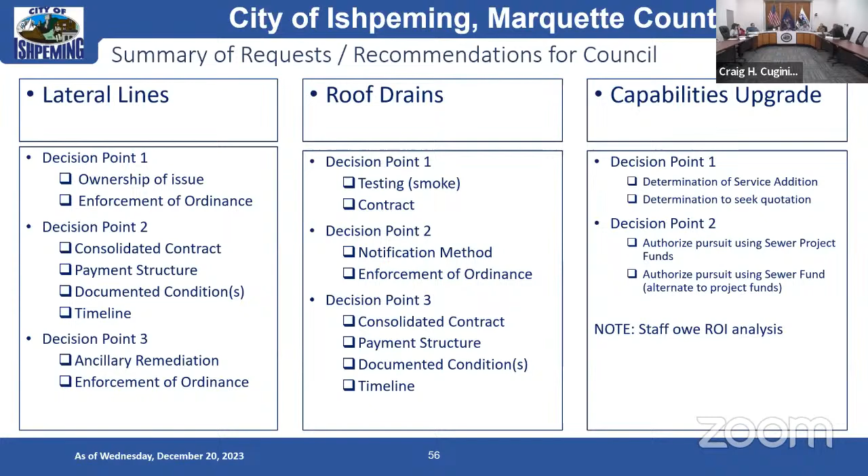Taking up the capacity, yeah, and because that's all downstream of where we're talking about, if that's overloaded and flooded and it backs up, then it complicates the issue we're discussing. It significantly overloads the neighborhood in question at a rapid rate.

My thoughts on that then is, if the storm sewer system is down there too, in the same area, would it be possible to look at rerouting all of those drains into the storm sewer system? Or would that be a huge cost? That's what Councilmember Rennell was asking, Halverson.

She was asking for clarity, that when you take the drain and disconnect it from the sanitary sewer, you've got to drain it elsewhere. The elsewhere is going to be onto the ground, into the storm sewer, but we already have that system. We're just putting the water in the right place. So when you disconnect it from the sanitary sewer and put it in the correct place, there's no new construction of storm sewer, we'd just have to divert it onto the correct path. All we're doing is putting the water in the right place.

I definitely think that should be looked into, and my only ask for direction on this is: find us data on how many are contributing. I think that's what was presented to us, how many there are, and the capacity of that. I think the manager interpreted our direction correctly, that that's definitely a contributing factor.